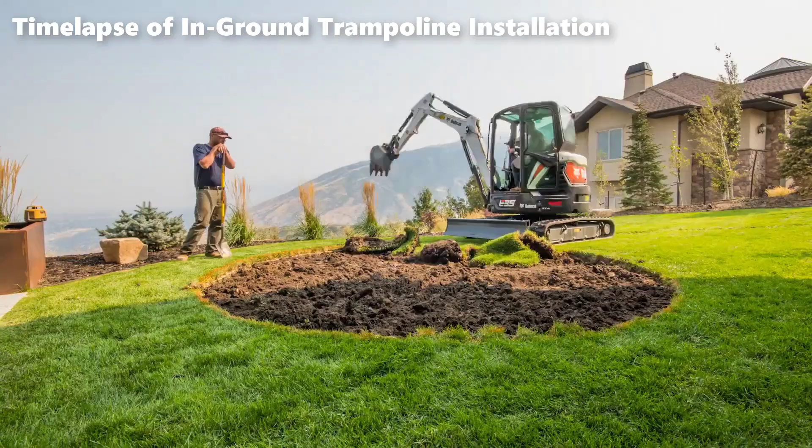Beginning with the excavation phase, heavy machinery deftly removes soil to create a precise pit matching the dimensions of the trampoline. Watching the ground gradually give way to reveal the earth below sets the stage for the exciting transformation ahead.

As the excavation progresses, workers position the trampoline frame within the emerging pit. Guided by precise measurements, they lower the sturdy structure into place, ensuring it fits snugly and securely. This crucial step sets the stage for the subsequent assembly of the trampoline components.

With utmost precision, the workers lower the trampoline frame into the excavated area, aligning it to ensure a perfect fit. Each corner is carefully checked to guarantee proper alignment and stability, essential for safe bouncing experiences. Their attention to detail not only ensures the trampoline rests securely within the pit, but also lays the foundation for countless hours of enjoyment and recreation, promising a haven for fun-filled moments in the backyard landscape.

Next, the trampoline mat is carefully positioned, unfurling like a giant canvas over the frame. This process begins with leveling and smoothing the excavation area to create a stable base. Geotextile is then laid to provide additional reinforcement and prevent soil erosion.

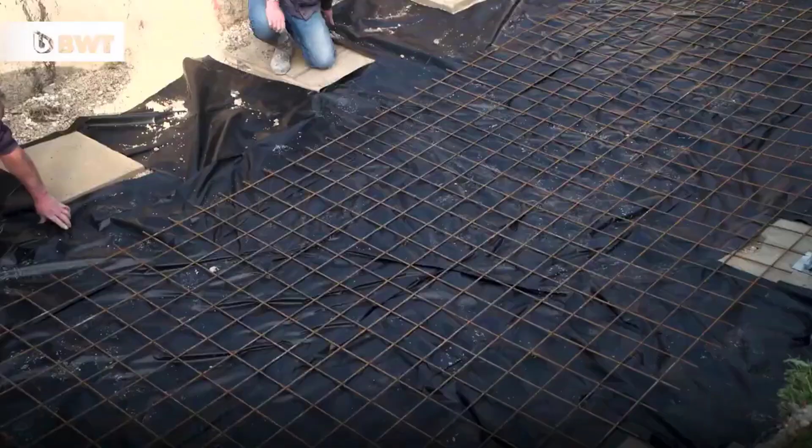Before proceeding, the gravel layer is covered with polyethylene film to maintain integrity and prevent soil contamination. Reinforcement is then laid across the entire excavation area to enhance structural stability.

The metal struts are assembled next, with 8 straight bars forming the upper part and 12 flat bars connecting the lower part. Finally, a concrete layer at least 3 centimeters thick is poured over a steel mesh, allowing for proper curing over a period of 3 weeks.

Once the earthwork is complete, it's time to assemble the wooden structure of your pool. Begin by assembling the wooden construction, followed by the wooden planks.

Start with the planks forming the wide face of the pool, ensuring tabs face upwards. Place the planks for the long edges of the pool on the corner pieces. Attach end profiles of the struts and assemble wooden wedges for the handrail, ensuring they are flush with the top of the wall. Mount the fittings to stabilize the handrail and keep it in position.

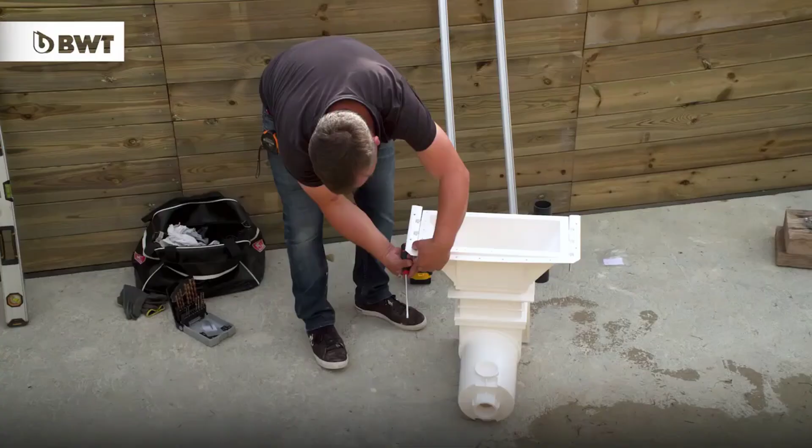To ensure effective filtration, carefully assemble the skimmer, taking care to tighten screws by hand to prevent damage. Next, install the inlet nozzle securely, ensuring proper alignment. Then, strategically place the filtration pipes to avoid any bends or kinks, maximizing the efficiency of water circulation and filtration within your massive wooden pool.

During the assembly of automatic cover parts, it's essential to install the roller support bracket both outside and inside the wooden structure. This ensures proper support and functionality of the automatic cover system, allowing for smooth operation and effective pool coverage.

To ensure a watertight seal and durable construction, attention to detail is crucial during the installation of the waterproofing membrane for your massive wooden pool.

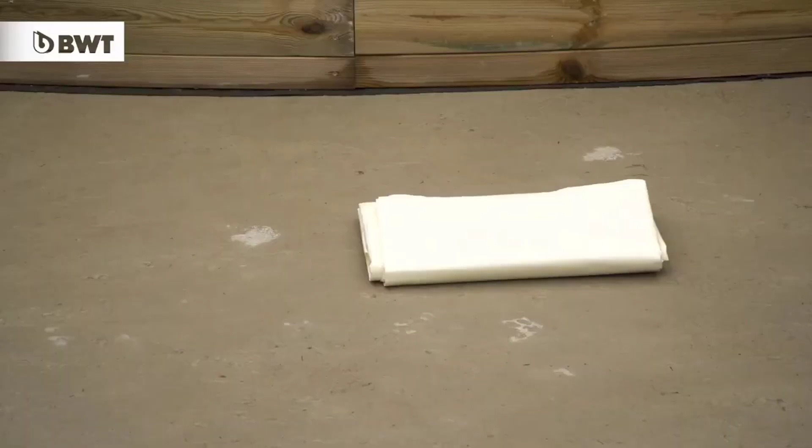Begin by positioning each part of the clamping profile meticulously to ensure a seamless connection between components. It's imperative that the holes drilled for fasteners are precisely horizontal and perpendicular to the pool wall, guaranteeing structural integrity and a secure fit. Next, carefully apply the liner, ensuring it aligns perfectly with the pool's dimensions and contours.

Pay close attention to the corners, ensuring they correspond precisely with the pool wall for a snug and seamless fit. Smooth out any wrinkles or creases in the liner to prevent potential leaks and maintain an aesthetically pleasing appearance.

Before filling the pool with water, it's essential to install flanges at designated locations. These flanges provide additional reinforcement and sealing, ensuring the waterproofing membrane remains intact and effective over time. Installation of the flanges should occur once the water reaches specified levels, allowing for proper alignment and a secure attachment.

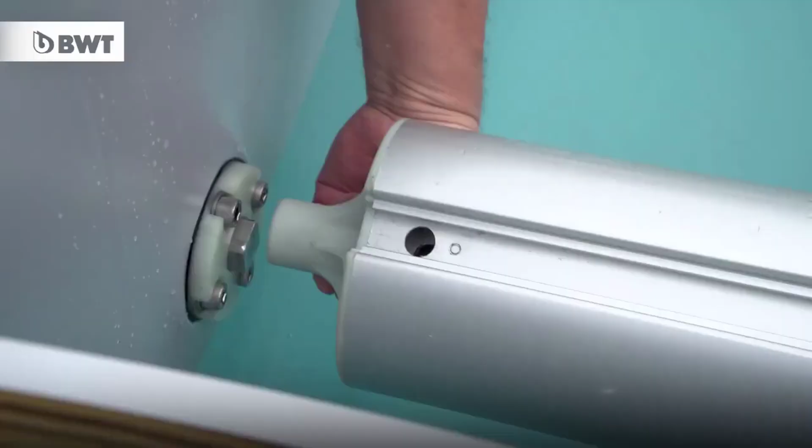Begin by sliding the shaft of the automatic cover flush with the wall passage, ensuring it fits snugly into place. Next, firmly press the shaft into the axle using a rubber mallet, ensuring it is securely seated. This step is critical for ensuring smooth operation and preventing any potential slippage or misalignment of the cover mechanism.

After securing the shaft, attach the beams over the pool to support the automatic cover system. These beams provide structural reinforcement and ensure the cover operates smoothly and efficiently. Use O-rings at connection points to create a watertight seal, preventing water leakage and ensuring the integrity of the cover system.

Additionally, install the partition wall and underwater light to enhance the functionality and aesthetics of your pool. The partition wall helps separate different areas of the pool, while the underwater light provides illumination for nighttime swimming and adds ambiance to your pool area.

Extending the handrail 25 mm into the pool's interior ensures stability and safety. It also adds a finishing touch to the pool's design.

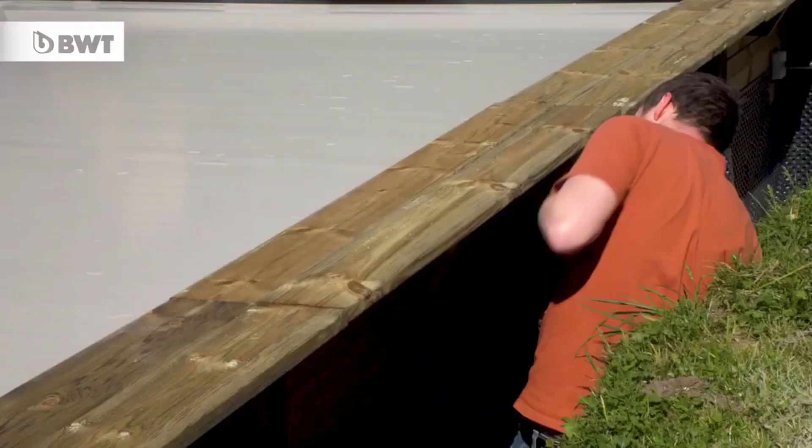Next, assemble and install the slat frames between the wall and the beam, ensuring they are positioned accurately. Secure tension bands to the slat frame to maintain tension and prevent sagging, ensuring the cover operates smoothly.

Finally, mount the motor for the automatic cover by sliding the rubber ring onto the motor shaft. Ensure the rubber ring fits snugly to prevent slippage during operation. Insert the pin into the shaft recess securely, completing the installation of the motor.

By following these detailed assembly instructions, you'll ensure the successful setup of your massive wooden pool, Urban Pools XL. With each step carefully executed, your pool will boast structural integrity, reliability, and longevity.

From the initial earthwork preparation to the installation of the automatic cover and finishing touches, every aspect of the assembly process contributes to creating a luxurious and inviting backyard oasis.

With your Urban Pools XL assembled according to these instructions, you'll enjoy years of relaxation and enjoyment with family and friends. Whether you're lounging poolside on sunny days or taking a refreshing dip to escape the heat, your massive wooden pool will be a focal point of outdoor entertainment and leisure.

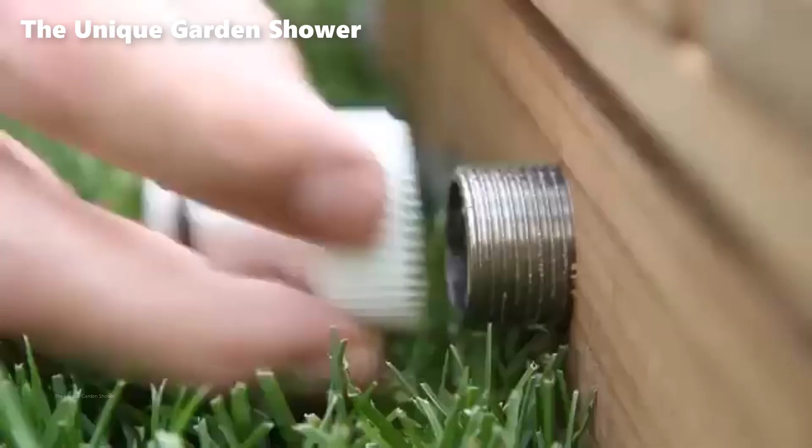Upon stepping onto its platform, the magic unfolds. A spectacle of water emerges, rising gracefully to towering heights at the perimeter before delicately descending in a cascade, akin to the soft patter of a summer rain.

The interplay of light and liquid creates an enchanting ambiance, inviting users to indulge their senses and bask in the moment. This garden shower is more than just a practical amenity, it's an oasis of rejuvenation.

After an invigorating workout or a leisurely sunbathing session, its refreshing embrace becomes a welcome respite. The gentle caress of the falling water soothes tired muscles, while the revitalizing mist invigorates the senses, leaving one feeling invigorated and renewed.

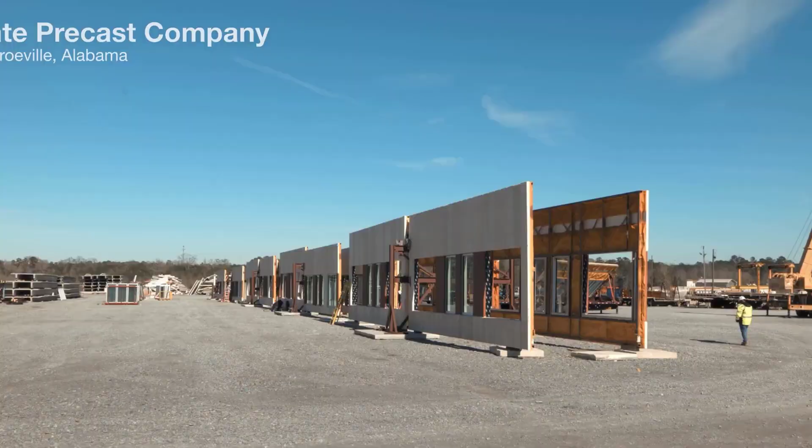The utilization of prefabrication not only streamlines the building process, but also enhances quality control, fosters safer working conditions, minimizes waste, and promotes energy efficiency.

From the innovative GateLite architectural facade system to the traditional prefabricated concrete panels, adorned with gate stone finish, every aspect of the design reflects a commitment to longevity and environmental stewardship.

The project commenced with the construction of the first new filter bed, preceded by the careful demolition of the existing filter bed.

The new beds were meticulously designed, each comprising 37 wall units standing at 2.50 meters in height, along with 208 filter bed tiles. Notably, the individual wall units were specially cored to accommodate feed pipes and washout pipes, emphasizing the attention to detail in the design phase.

A key aspect of the installation was the unique stainless steel bolting system used to marry the filter bed wall panel units together. This innovative approach ensured structural integrity and stability, critical for the efficient functioning of the waste treatment process. Additionally, props were strategically employed to support every third concrete unit, while steel fixings were securely fastened, further enhancing the robustness of the system.

Phase 1 of the project was successfully completed, marking a significant milestone with the first new bed brought into immediate operation. This was accompanied by the demolition of the old waste treatment plant, making way for the installation of the brand new filter bed system.

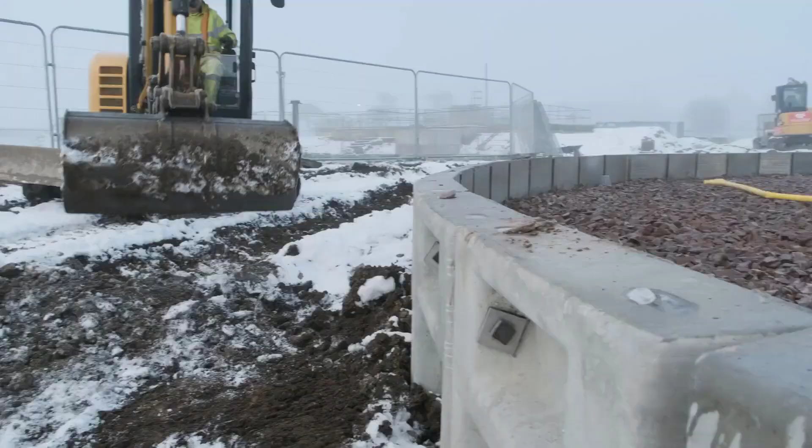supplied from FP McCann's Littleport factory, highlights the scale of the undertaking. Despite the complexity and volume of materials involved, meticulous coordination ensured smooth progress throughout the project.

During preparation, all loose and deteriorating concrete is removed to ensure a clean, porous surface for optimal bonding with TF structural deep repair mortar. Thorough removal is essential for a durable and long-lasting restoration of the staircase.

Using 2x8s and duct tape, forms are constructed to match the desired shape and dimensions of the staircase. Care must be taken to protect the wood with duct tape to prevent unwanted bonding with the TF structural deep repair mortar. The forms are positioned and secured in place, ensuring they are level and properly aligned.

Attention to detail is crucial during this phase to guarantee the final stairs meet structural and aesthetic requirements. Additionally, any necessary adjustments are made to accommodate variations in height and slope.

Once the forms are in place, they serve as a mold for the TF structural application. The forms provide boundaries for the mortar, guiding its placement and ensuring uniformity across the staircase. Properly formed stairs result in a smoother application process and a more polished final outcome.

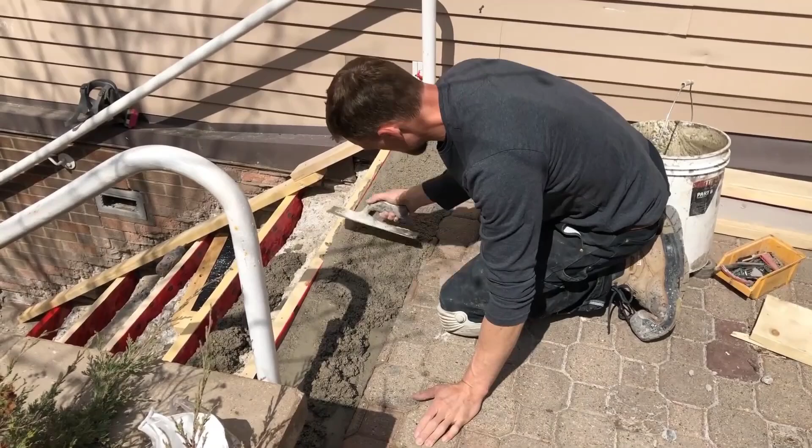During mixing, attention is paid to achieve the desired consistency. The mixture should be smooth and workable, allowing for easy application while ensuring it stays in place without flowing off the stairs. The proper consistency ensures optimal bonding and a uniform finish.

Once the mixture is prepared, it is applied to the staircase surface using a trowel. Careful consideration is given to ensure even coverage and proper thickness, especially when applying a skim coat. The trowel is used to spread the overlay evenly, working it into the surface and smoothing out any imperfections.

After the overlay is applied, additional tools may be used to refine the finish. For instance, a margin trowel can be used to round the edges of the steps, creating a smoother transition between the overlay and the existing structure. A broom may be used to create texture on the treads, enhancing traction and safety.

Edge finishing involves using a margin trowel or similar tool to round the edges of the steps, ensuring a smooth transition between the overlay and existing structure. This process creates a polished appearance and minimizes the risk of chipping or unevenness along the edges of the staircase.

Troweling and final swipes are critical steps in achieving a smooth and uniform finish on the concrete overlay. After the overlay mixture is applied to the staircase surface, a trowel is used to spread and work the material into place. This process helps to ensure even coverage and proper thickness throughout the stairs.

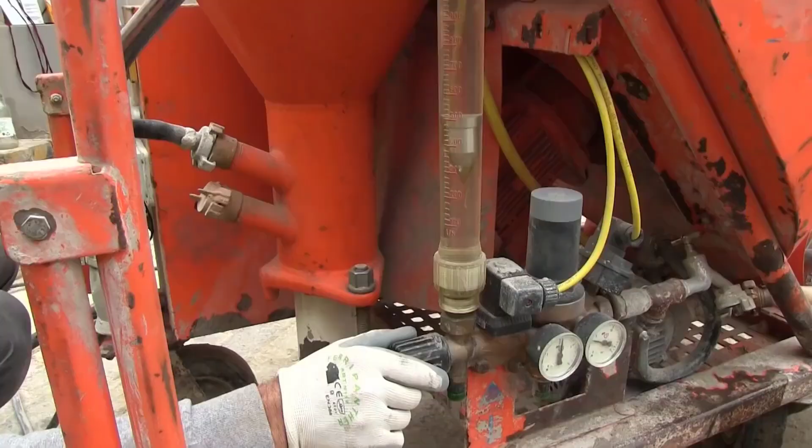During the placement phase of the sprayable rendering process, the prepared mortar mixture is loaded into the machine launcher. It's crucial to achieve the right consistency by gradually adding water until a creamy texture is attained, ensuring optimal workability. The nozzle of the mortar spraying device is positioned perpendicular to the surface, typically maintained at a distance of 10 to 15 centimeters. With precision, the mortar is projected between the level points or guides, covering the entire surface evenly.

During leveling and finishing, the applied mortar is smoothed and leveled using appropriate tools such as wooden or rubber trowels. This process aims to create a uniform surface according to the desired finish. Once leveled, the mortar is left to reach the appropriate touch-dry stage before final finishing with a trowel.

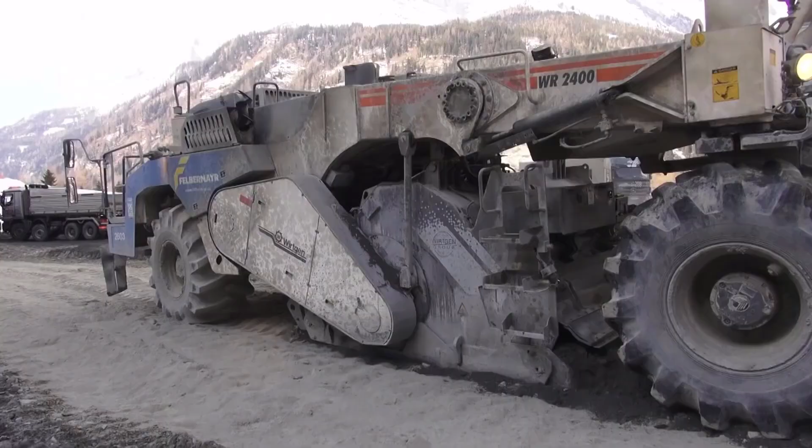The project in Zederhaus, undertaken by Felbermayr, aims to address the escalating traffic volume on the A10 Tauern motorway, which reached 20,000 vehicles per day by 2017. Initiated in 2013, it involves enclosing a 1,500-meter section of the highway to mitigate the impact on local residents.

The endeavor, endorsed by ASFINAG and governmental bodies, commenced with Felbermayr Tiefbau undertaking various tasks, including constructing bridges and widening the road. Significant efforts were made to accommodate the Zederhaus stream and maintain traffic flow during construction. This involved demolishing existing structures and employing shotcrete to stabilize slopes, covering an area equivalent to 4 football fields. Additionally, extensive use of anchors and concrete was necessary, with drilling depths reaching up to 15 meters.

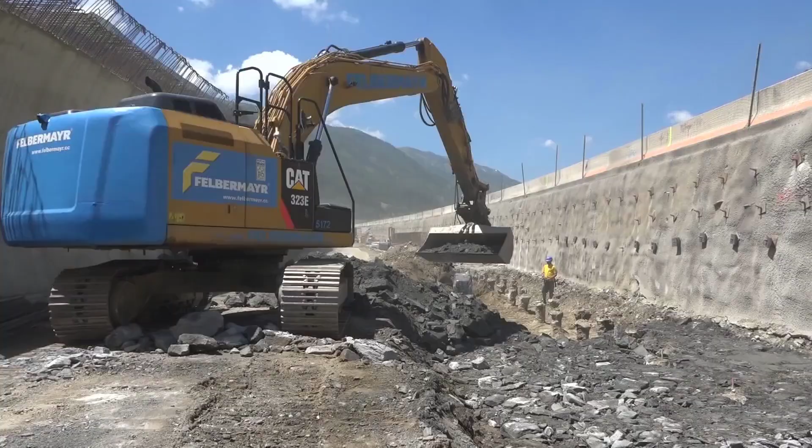The enclosure process began with the construction of tunnel tubes, necessitating unforeseen shallow foundations to enhance ground stability. Fire safety concerns led to the use of concrete rather than asphalt within the tunnels. Construction proceeded with open methods, coupling formworks for efficient pouring of concrete sections. A total of 125 segments were required for the tunnel construction, utilizing fire-resistant fiber concrete with substantial wall thicknesses.

Completion of the first tunnel tube in August 2015 marked a milestone, followed by the installation of electrical equipment and its opening to traffic in December 2015. The second tunnel tube's rough construction was completed in the same month, with subsequent sealing and membrane installation. Excavation for the enclosure began in February 2016, using material from the second tunnel tube's excavation.

By March 2017, both tunnel tubes were operational, contributing to noise reduction for local residents. This was supplemented by the erection of noise barriers before and after the enclosure. In July 2017, ASFINAG granted final approval for the project's completion, acknowledging Felbermayr's successful execution despite adverse conditions. The Zederhaus project represents a significant achievement, demonstrating Felbermayr's capabilities in managing complex infrastructure projects.

Despite challenges such as adverse weather and unforeseen ground conditions, the project was completed on schedule, providing relief to residents and enhancing safety for motorists.

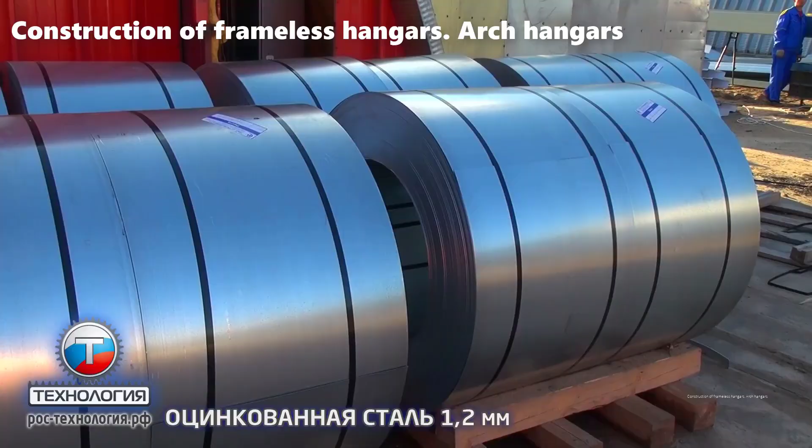The steel used has a thickness of 1.2 millimeters, ensuring durability and structural integrity, while also providing sufficient strength to support the construction and withstand various environmental conditions.

Steel shaping involves the process of manipulating steel materials into desired forms and configurations to meet specific structural requirements. This may include bending, cutting, welding, or forging the steel to achieve the desired shape and dimensions. Automated machinery may be employed to carry out these tasks with precision.

Various techniques, rolling, pressing, or stamping, may be utilized, depending on the complexity of the design and the properties of the steel being used. Proper shaping is essential for ensuring structural integrity, aesthetic appeal, and functionality of the final product. Attention to detail during the shaping process is crucial to meet design specifications, optimize material usage, and ensure the longevity and performance of the steel components in various applications.

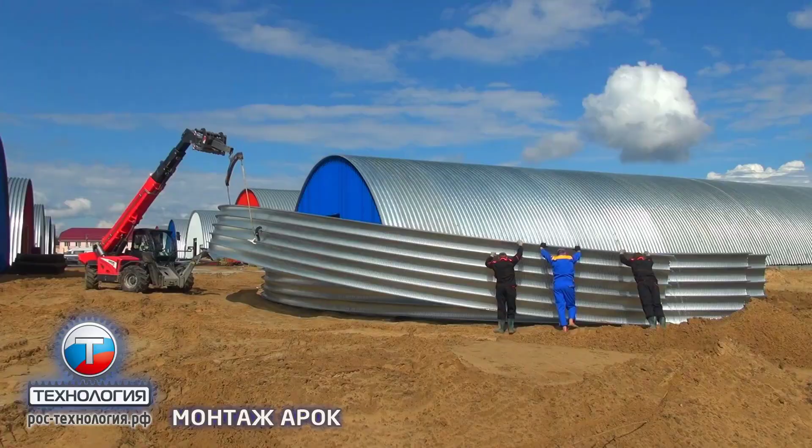Assembling the neck ring involves the careful construction and integration of a crucial component within a structure, typically found in applications such as tanks, vessels, or industrial equipment. The neck ring serves as a connection point or collar where other components are attached, or through which materials are transferred. The process begins with the selection of suitable materials for the neck ring, often steel or another durable metal alloy, chosen for its strength and corrosion resistance.

These materials are then cut, shaped, and machined to precise specifications to ensure proper fit and functionality within the overall assembly. Next, the individual components of the neck ring are assembled according to engineering drawings or schematics. This may involve welding, bolting, or riveting the pieces together, depending on the design requirements and the materials being used. Skilled welders or technicians meticulously join the components, paying close attention to detail to ensure structural integrity and alignment.

Once the individual components are assembled, the neck ring is integrated into the larger structure or system. This may involve welding or fastening the neck ring to other structural elements, such as tanks or vessels, using techniques that provide secure connections and maintain structural stability.

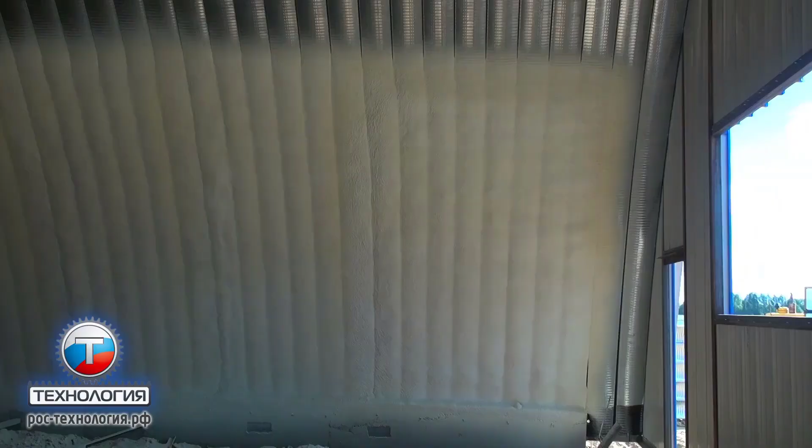The insulation process begins with meticulous preparation to ensure efficient and safe application. Technicians must adhere to specific guidelines to drill 12mm injection holes through mortar joints, maintaining a consistent pattern across the cavity wall. Additional openings are made around areas like windows, doors, and eaves to guarantee comprehensive coverage.

Each step of the process demands strict adherence to safety protocols. Technicians must don appropriate personal protective equipment, PPE, to mitigate potential health risks associated with handling insulation materials. This includes wearing gloves to protect the hands from chemical exposure and abrasions, overalls to prevent skin contact with the foam, boots to shield against slips, safety glasses to safeguard the eyes from debris, and a face mask equipped with appropriate filters to prevent inhalation of hazardous fumes.

The face mask is particularly crucial as it helps prevent respiratory allergies and sensitivities by filtering out harmful particulates and organic vapors, such as the isocyanate component present in polyurethane foam. Before the actual injection of foam into the cavity walls begins, it's imperative to conduct rigorous quality checks to ensure the efficacy of the insulation.

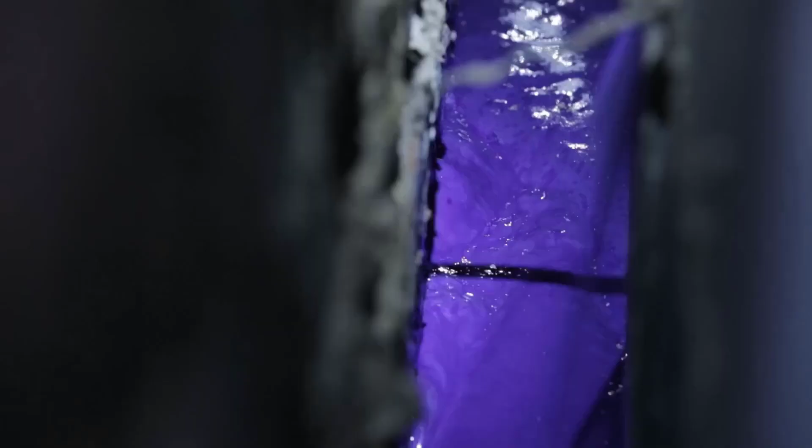Samples of the foam are produced to assess various parameters, such as reactivity, adhesion strength, and cell structure. This preliminary step is crucial in identifying any potential issues before proceeding with the full-scale injection process. The foam is carefully dispensed into a polythene-lined container to prevent contamination and maintain its purity.

Once dispensed, the reactivity of the foam is timed to ensure proper application. Technicians monitor the foam as it sets, paying close attention to its adhesion strength and the uniformity of its cell structure. Any deviations from the desired properties may indicate the need for adjustments or troubleshooting before proceeding further.

To accurately determine the foam's density, it is dispensed into a container with a known volume and allowed to cure completely. After curing, the weight of the foam is measured and recorded. By dividing the weight by the volume, technicians can calculate the foam's density, providing valuable insights into its insulation effectiveness.

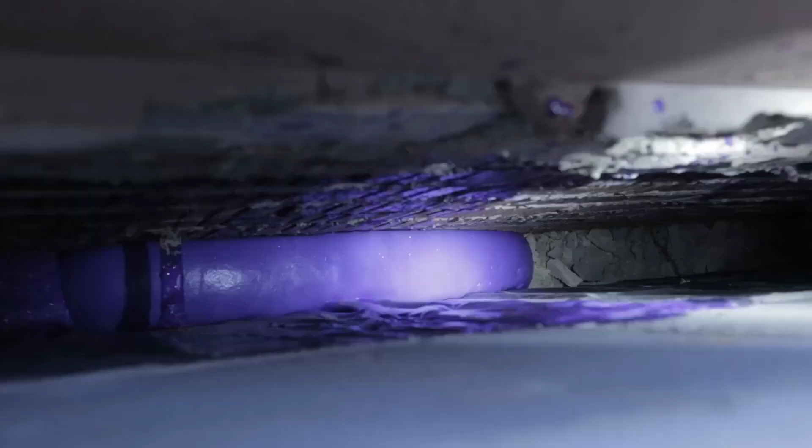With quality checks completed and parameters confirmed, the injection process commences. Foam injection proceeds methodically along each horizontal line of drilled holes, ensuring thorough coverage from the bottom of the cavity upwards. Dowels are utilized to mark filled injection points, preventing excess foam extrusion and ensuring precise application.

Throughout the injection process, technicians must exercise caution to avoid over-injecting the foam beyond its cream time. Over-injection can lead to undesirable outcomes, such as splitting and shrinking, compromising the integrity of the insulation. Additionally, care must be taken to prevent overpressurization of the cavity, especially in closed areas like window frames, to avoid potential damage to the structure.

Once each level of the cavity is filled, the set foam is carefully inspected to ensure proper adherence and uniformity. Technicians verify that the foam has adequately expanded and cured before proceeding to the next level. This approach guarantees that the insulation is applied effectively and delivers optimal performance in terms of thermal efficiency and structural integrity.

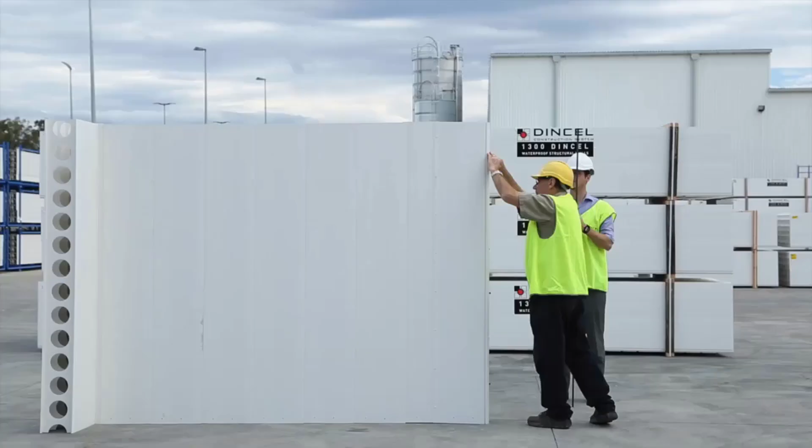Horizontal and vertical reinforcement hook bars streamline construction by simplifying installation processes. Their hook ends facilitate rapid alignment and connection, reducing labor time. These hooks interlock with other bars swiftly, ensuring a secure fit. Consequently, construction teams can expedite the placement of reinforcement, accelerating overall project progress. This efficiency not only saves time but also minimizes labor costs, making the construction process more economical without compromising structural integrity or safety standards.

The process begins with careful planning and preparation, where builders evaluate the dimensions and specifications of the structural components involved. Each corner must be precisely measured and marked to ensure accurate placement of panels or elements during assembly. Next, corner brackets or connectors may be utilized to secure the structural elements together. These brackets are often made of durable materials such as steel or aluminum and are designed to provide robust support and reinforcement at the corners. They come in various shapes and sizes depending on the specific requirements of the project.

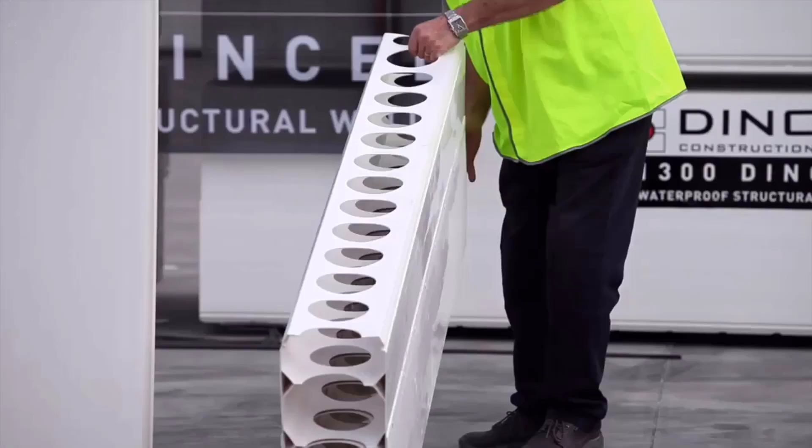During assembly, attention to detail is crucial to guarantee proper alignment and fitment of the structural elements. Builders must ensure that corners are square and true, using levels, squares, and other precision tools to verify alignment. Once the panels or structural elements are in position, fasteners such as screws, bolts, or welding may be employed to secure the corner assembly firmly in place. These fasteners are chosen based on factors such as load-bearing capacity, corrosion resistance, and structural requirements.

Horizontal reinforcement installation involves placing steel bars parallel to the ground within concrete structures. This process enhances structural strength and durability by reinforcing the concrete against tension forces such as those experienced during earthquakes or high winds.

Main panel installation involves positioning large structural elements, often prefabricated, in designated locations to form the primary framework of a construction project, such as a lift shaft or stairwell. Proper alignment and anchoring are crucial for structural integrity.

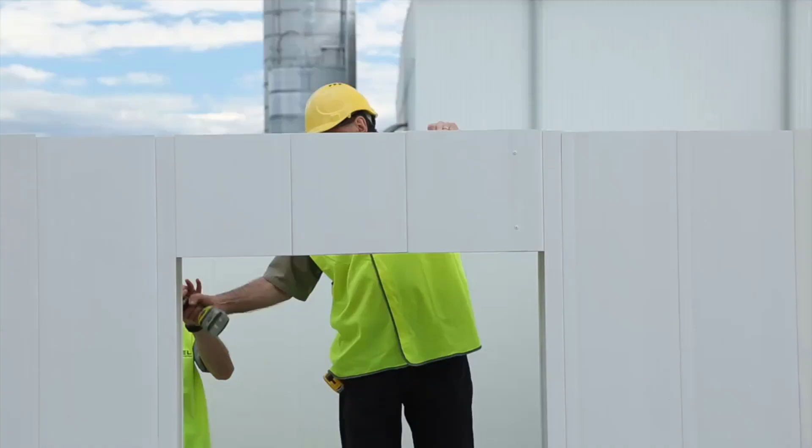Horizontal reinforcement and corner hook bars are steel components used in construction to strengthen concrete structures. Horizontal bars reinforce against tension forces, while corner hooks facilitate secure connections at corners, enhancing structural stability. Panels can be precisely cut to specified door length sizes, ensuring a tailored fit for door installations within a lift shaft or stairwell. This customization optimizes efficiency and accuracy in the construction process.

Before laying tiles, prepare the substrate, ensuring it's clean, dry, and level. Verify flatness, adhering to the specified 1 mm deviation per 2 meters. Opt for a C2 class tile adhesive known for its enhanced adhesion, particularly ideal for flooring applications. This ensures the tiles adhere securely to the substrate, reducing the risk of displacement or cracking over time. Such preparation forms the foundation for a durable and aesthetically pleasing tile installation.

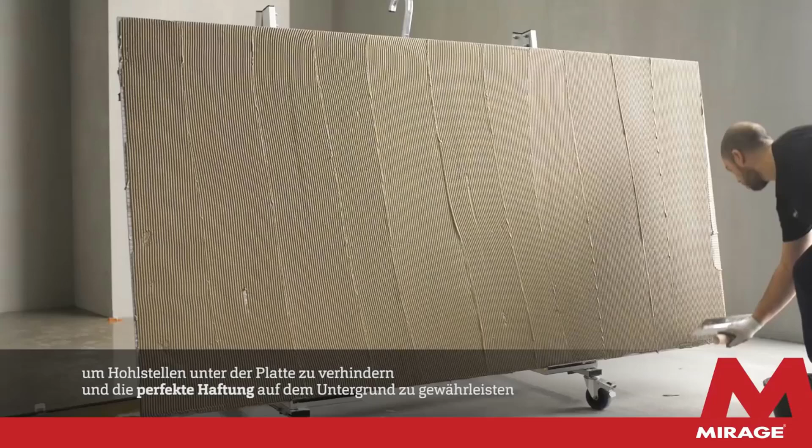Applying adhesive in a double layer is recommended to guarantee optimal adhesion and eliminate voids beneath the tiles. This method involves spreading a first layer of adhesive evenly across the substrate using a notched trowel. Subsequently, another layer is applied over the first, ensuring complete coverage and filling any gaps. The double layer technique ensures a strong bond between the tiles and substrate, minimizing the risk of air pockets and enhancing the overall stability and longevity of the tile installation.

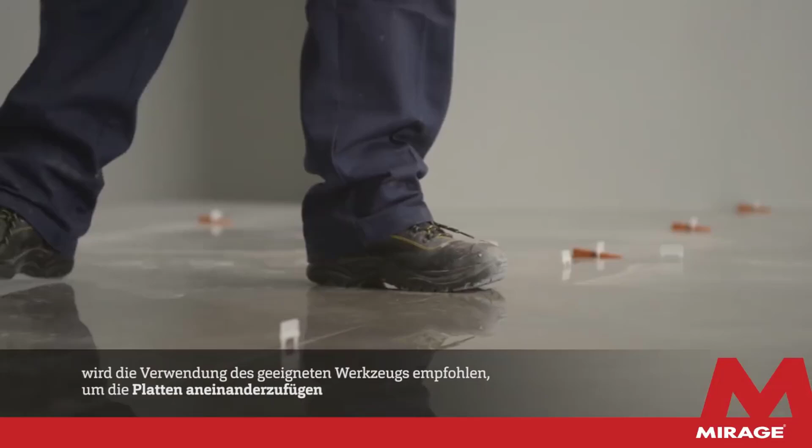To ensure a flawless tile installation, it's crucial to eliminate excess air by tapping tiles gently from the center to the edges. This process prevents potential cracking or breaking during installation, guaranteeing tiles lay flat and securely. Using appropriate tools for joining tiles is essential, promoting precise alignment and minimizing irregularities. Employing a suitable leveling system is equally critical, maintaining a completely flat tile surface and preventing lippage between adjacent tiles. These practices ensure not only an aesthetically pleasing result, but also a durable and long-lasting tile installation, resistant to potential issues such as unevenness or displacement.

T-type tile adhesive, specifically designed for wall tile applications, offers several advantages that contribute to a successful and secure installation. One of the primary benefits is its ability to reduce slippage during the installation process, particularly when working with larger or heavier wall tiles.

The T-type adhesive, also known as thin-set mortar, is formulated with special additives that enhance its bonding properties and improve adhesion to vertical surfaces. This adhesive typically has a thicker consistency compared to standard tile adhesives, providing better support and minimizing the risk of tiles sliding down the wall before the adhesive sets.

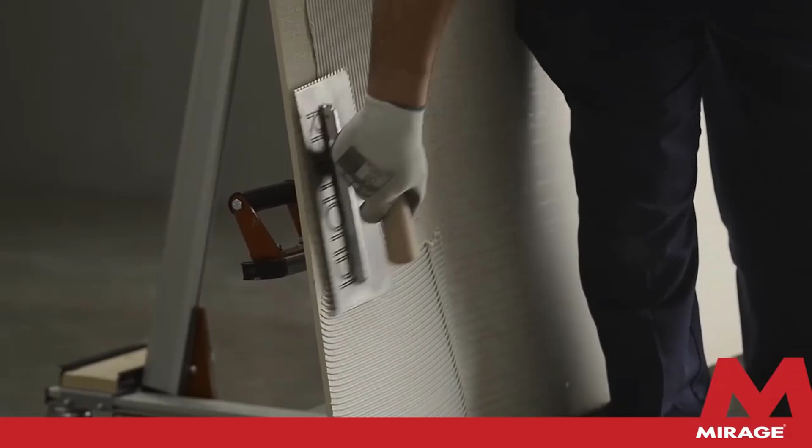The unique formulation of T-type adhesive includes polymers and additives that increase its tackiness and reduce the likelihood of tiles shifting or slipping during installation. This is especially important when working with large format or heavy wall tiles, as their weight can put additional stress on the adhesive as it sets.

Furthermore, T-type adhesive often has extended open times, allowing installers more flexibility to adjust tile placement before the adhesive sets. This is advantageous when working on intricate or detailed installations where precise alignment is critical. Another factor that contributes to reduced slippage is the texture of T-type adhesive. Many T-type adhesives have a gritty or rough texture that provides additional grip between the tile and the substrate, further minimizing the risk of slippage.

Additionally, T-type adhesive is formulated to withstand vertical pressure and gravity, ensuring that tiles remain securely in place once installed. This helps prevent issues such as tiles sagging or shifting over time, which can compromise the integrity of the installation.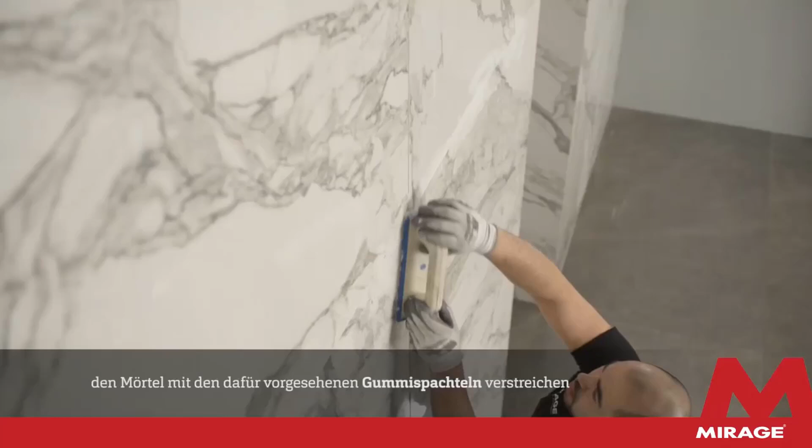Once the tiles are set and the adhesive has cured slightly, excess adhesive or grout must be removed to achieve a clean and polished look. This is typically done using a damp sponge, which is lightly run over the surface to wipe away any excess material. Care must be taken not to disturb the tiles while cleaning. This final step adds the finishing touch to the tile installation, leaving behind a professional and flawless result.

The initial step in the trenchless shaft rehabilitation process involves the meticulous digitization of the shaft using cutting-edge 3D laser scanning technology. This advanced scanning equipment is strategically positioned within the existing shaft, ensuring comprehensive coverage of the entire structure. Controlled through an intuitive app interface, the scanner systematically captures detailed data points at 1-meter intervals from the top to the bottom of the shaft.

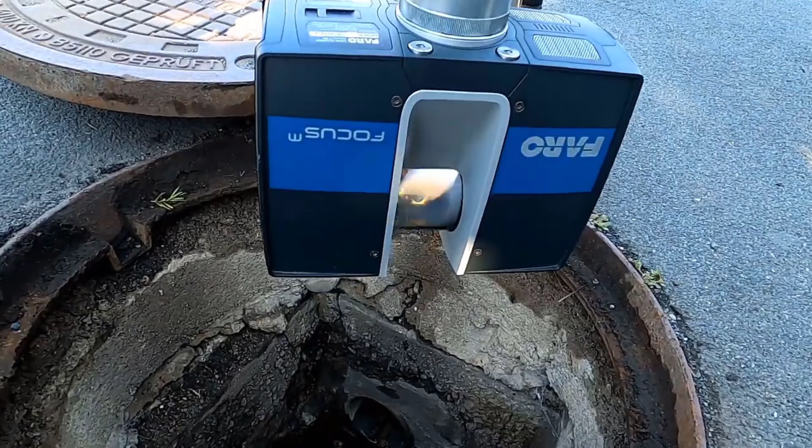The collected data is then processed using specialized software, where it undergoes intricate analysis and compilation. Engineers meticulously examine the digital representation of the shaft, leveraging the comprehensive 3D model to gain insights into its condition and structural integrity. This detailed model serves as a vital foundation for the subsequent stages of the rehabilitation process.

Through the 3D model, engineers can identify any existing defects, deterioration, or anomalies within the shaft. From cracks and corrosion to deformations and misalignments, every aspect of the shaft's condition is meticulously evaluated. By conducting a thorough assessment, engineers can determine the most appropriate and effective rehabilitation measures to address any identified issues.

Moreover, the digital model facilitates collaborative discussions among stakeholders, allowing for informed decision-making regarding the rehabilitation plan. Engineers can visualize the proposed interventions within the context of the digital model, enabling them to assess their feasibility and potential impact accurately.

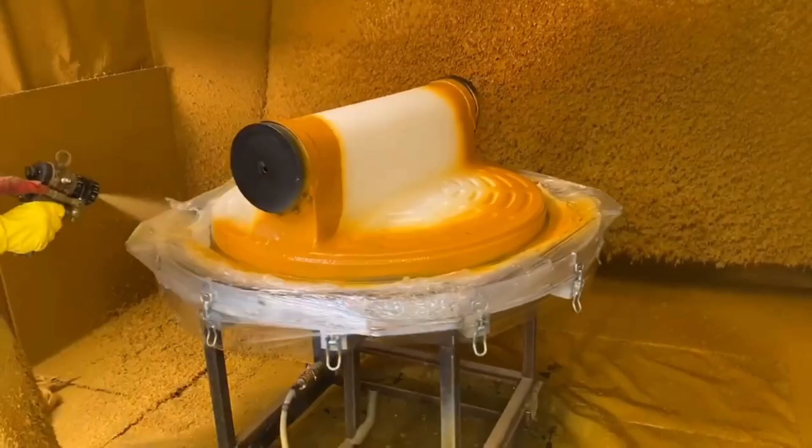With the 3D model at their disposal, engineers can engage in collaborative discussions to devise an optimal rehabilitation plan. Factors such as structural integrity, material requirements, and project timelines are carefully considered during this phase.

At the heart of the PREDL-FLEXLINER system lies precision engineering and meticulous craftsmanship. Using computer numerical control, CNC, milling technology, a negative mold of the new shaft collar is crafted. This mold serves as the template for producing the installation components required for rehabilitation. Skilled technicians meticulously manufacture the PREDL-FLEXLINER components, ensuring uncompromising quality and dimensional accuracy.

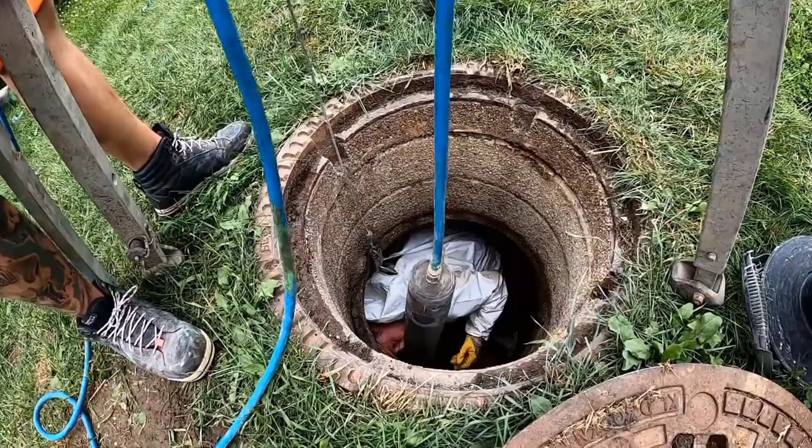Prior to the insertion, a section of the shaft, typically 66 centimeters, is excavated to accommodate the rehabilitation construction. The liner is then carefully folded and inserted into the shaft non-destructively through the access point, known as the bonnet. Specialized sealing bladders are strategically positioned to seal off inflows and outflows within the shaft. Additionally, styrofoam support bodies are introduced during backfilling to provide stabilization and prevent buoyancy once the liner is securely positioned within the shaft.

Attention turns to the rehabilitation of the shaft rings. A smaller head, constructed from durable 3mm plastic material, is utilized for this purpose. Through meticulous welding techniques, the connection between the liner and the smaller head is established, ensuring structural integrity and longevity. Any protrusions or irregularities originating from the shaft rings are addressed and sealed with protective caps to prevent infiltration during backfilling.

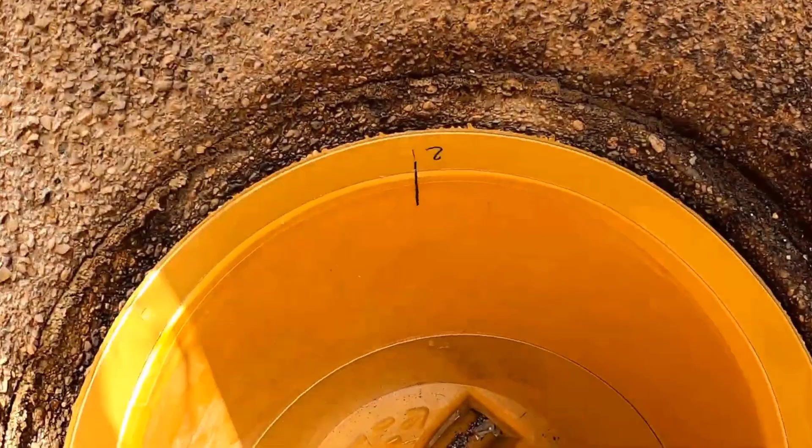With the rehabilitation components securely in place, the final phase of the process commences. Grout mortar is meticulously introduced into the shaft to ensure proper backfilling and structural stability. The styrofoam support bodies, provided by PREDL, are removed, and the fully rehabilitated structure undergoes a thorough cleaning process. Finally, meticulous attention is given to the aesthetics of the rehabilitated shaft, with any imperfections addressed and rectified.

Approximately 9,000 tunnel rings, each composed of 6 segments, are essential for constructing the dual Forrestfield Airport link tunnels. A custom concrete blend is formulated to meet stringent requirements for the tunnel segment construction.

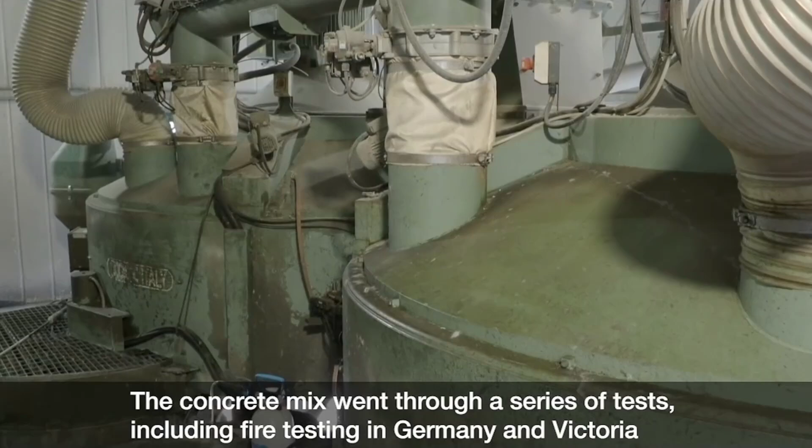The concrete mix underwent rigorous examination, including extensive fire testing conducted in Germany and Victoria. These tests assessed its resilience and durability under high-temperature conditions, crucial for tunnel safety. Various other evaluations were performed, scrutinizing its strength, composition, and reaction to stress. The aim was to ensure the mix met international standards, guaranteeing optimal performance and safety within the tunnels of the Forrestfield Airport link, underscoring the rigor applied in its development and validation.

During construction, a steel reinforcement cage is meticulously installed within each segment. 2 distinct cage types are utilized, tailored to suit the specific location within the tunnel, ensuring structural integrity and alignment compliance throughout the Forrestfield Airport link construction process.

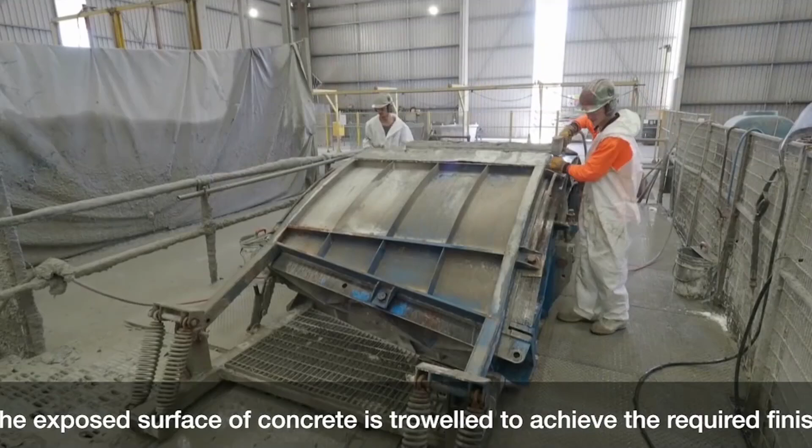Once the concrete is placed, skilled workers meticulously use trowels to smooth and perfect its exposed surface. This process ensures the desired finish, enhancing both the appearance and functionality of the tunnel segments within the Forrestfield Airport link, meeting stringent quality standards and ensuring optimal performance in service.

The steam chamber, operating at 100% humidity and temperatures reaching up to 55 degrees Celsius, provides an ideal environment for the curing process. This controlled setting accelerates concrete strength development, promoting robustness and durability in the tunnel segments for the Forrestfield Airport link, ensuring their structural integrity.

During curing, the segments are enveloped in insulated covers, maintaining controlled temperature and relative humidity for up to 72 hours. This prolonged period fosters an optimal curing environment, allowing the concrete to attain its desired strength and durability. This meticulous treatment ensures the tunnel segments for the Forrestfield Airport link achieve the necessary structural integrity and performance standards before deployment.

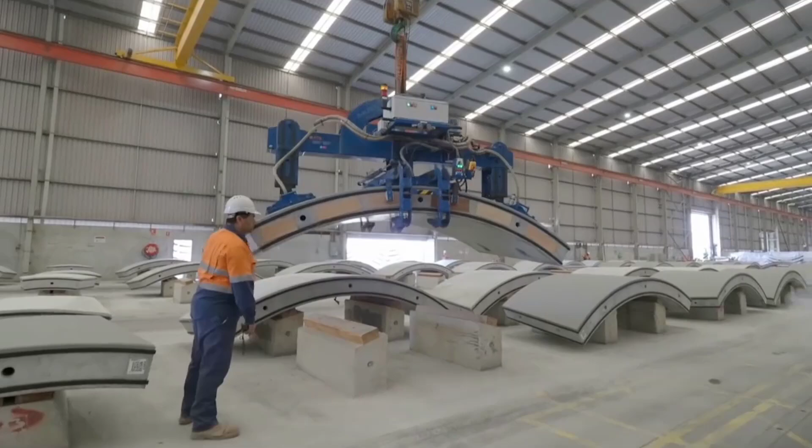Following segment construction, a meticulous application of 2 layers of waterproofing epoxy paint is undertaken on the external surface. This process serves as a protective shield, guarding against moisture ingress and environmental factors. The epoxy paint, renowned for its durability and sealing properties, forms a robust barrier, enhancing the longevity and resilience of the tunnel segments within the Forrestfield Airport link.

This safeguarding measure not only bolsters the structural integrity, but also ensures sustained performance, minimizing potential degradation from water exposure and external elements, crucial for the tunnel's reliability and safety throughout their operational lifespan.

Upon completion, each segment is delicately transferred to a tilting table, carefully maneuvered to facilitate further processing and quality checks. Once inspected and approved, these segments are moved to storage facilities, awaiting deployment by the tunneling team. The storage period allows for logistical coordination, ensuring the segments are readily available as needed during the construction phase of the Forrestfield Airport link.

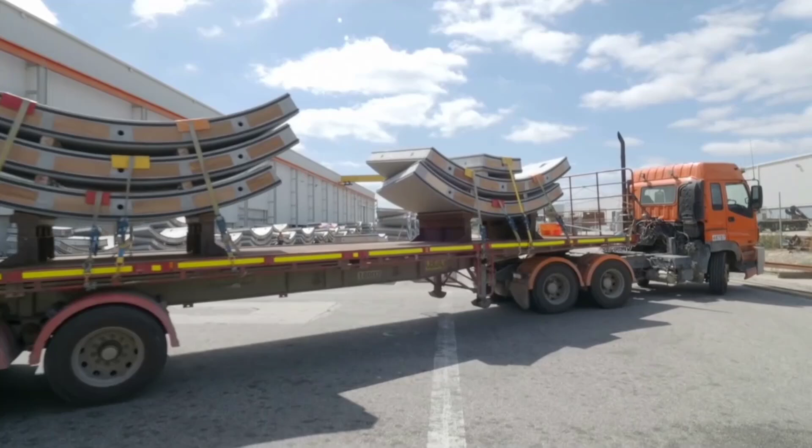While in storage, measures are taken to preserve their integrity and quality, safeguarding against any potential damage or deterioration. This handling and storage protocol guarantees that the segments are in optimal condition and seamlessly integrated into the construction process, contributing to the efficient and precise assembly of the tunnels when required.

Installing the supporting mesh involves affixing steel or synthetic mesh to tunnel walls to reinforce and prevent potential rockfall hazards. Shotcrete, a high-velocity sprayed concrete, is applied onto the tunnel walls post-mesh installation, fortifying the structure and enhancing stability against geological pressures and erosion.

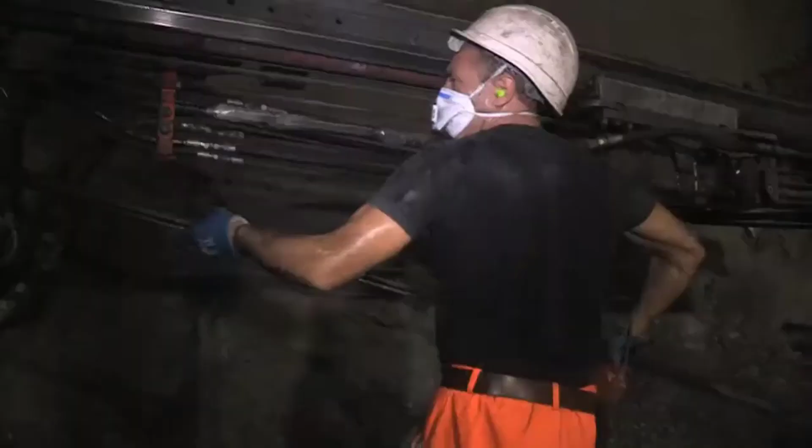Drilling for securing anchors entails precision drilling into the tunnel walls or surrounding rock. Holes are strategically positioned to insert anchors, ensuring stability. Specialized machinery drills holes of specific depths and diameters, and workers carefully place anchors, often made of steel, securing them in place to fortify the structure against potential shifts or collapses.

Securing anchors involves placing steel or concrete anchors into drilled holes, ensuring a secure fit. These anchors reinforce the tunnel walls, enhancing structural integrity and stability.

Drilling the blasting holes is a process where specialized equipment drills holes of precise depths and orientations into predetermined locations within the rock face. These holes are strategically planned to facilitate controlled blasting. The drilling machinery carefully creates the necessary pattern and depth, ensuring the subsequent explosives are placed effectively for controlled fracturing and excavation during the blasting phase of tunnel construction.

Preparing for the blast involves implementing safety protocols, evacuating personnel, and securing the area to ensure controlled detonation safety. Filling with two-component explosive involves precisely loading the drilled holes with measured amounts of distinct compounds, ensuring a controlled and effective blasting charge.

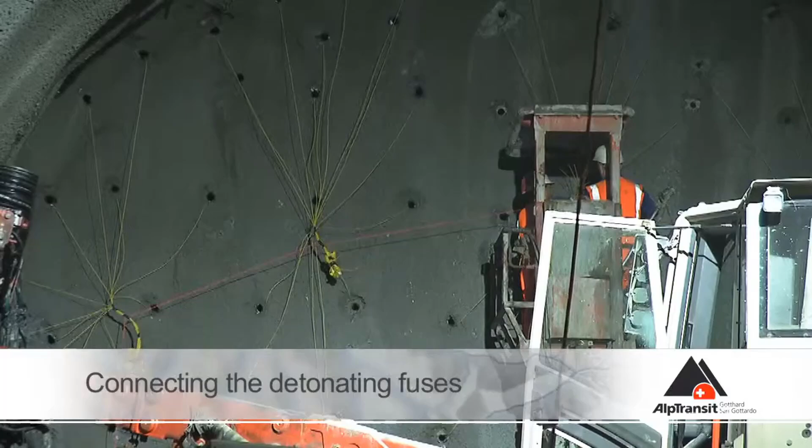Connecting the detonating fuses is a critical step in initiating a controlled explosion. After loading the holes with explosives, trained personnel meticulously connect the detonating fuses. These fuses serve as the link between the blasting caps or charges and the initiator, ensuring a sequential and controlled ignition. Workers carefully handle the fuses, ensuring they are securely attached to the explosives and properly insulated to prevent accidental ignition.

Various safety measures, including proper grounding and insulation, are observed during this process to minimize risks. Each fuse's length is calculated to introduce a calculated delay between charges, enabling a sequential detonation pattern, crucial for controlled fracturing and excavation of the rock mass.

Quality checks are conducted to verify the connection's integrity, ensuring they're free from any damage or defects that could compromise the detonation sequence. Any irregularities or faults are promptly addressed before the blasting operation. Clear communication among the team is essential during this phase to confirm that all connections are set correctly. Once confirmed, the area is further secured, and the initiation sequence is activated remotely, triggering the detonation process in a controlled and safe manner.

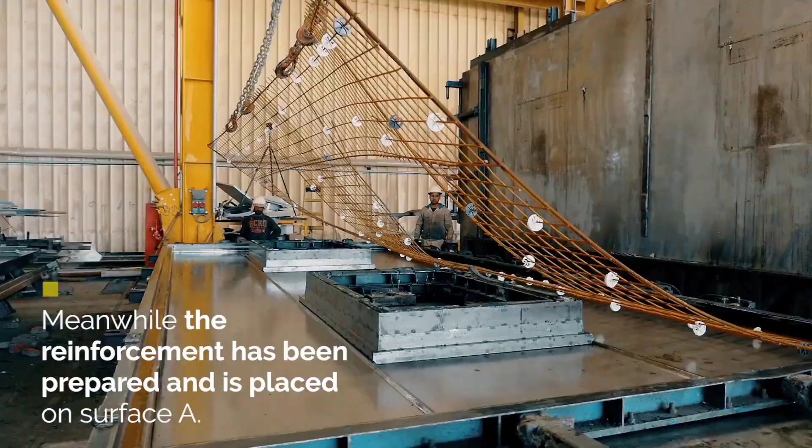Phase 1: Preparation and casting of surface A. The initial stage of this intricate process commences with the fastidious preparation of surface A. It begins with a meticulous cleaning routine, followed by the application of a release agent, ensuring a flawless separation once the panel is cured. Precision is key as mechanical extension arms are utilized to adjust the width of the panel, enabling seamless adaptation to desired dimensions. Subsequently, the bottom and top shutters are placed hydraulically, forming the fundamental framework for the panel.

The critical attachment of window molds to surface A, facilitated by magnets, signals the commencement of the intricate assembly process. Simultaneously, the reinforcement is meticulously prepared and strategically placed atop surface A to withstand the concrete pour. With acute precision, concrete is poured, guided by calibrated markers or indicators meticulously placed along the shuttering. Vibrations then ripple through the newly poured concrete, ensuring optimal settling and cohesion.

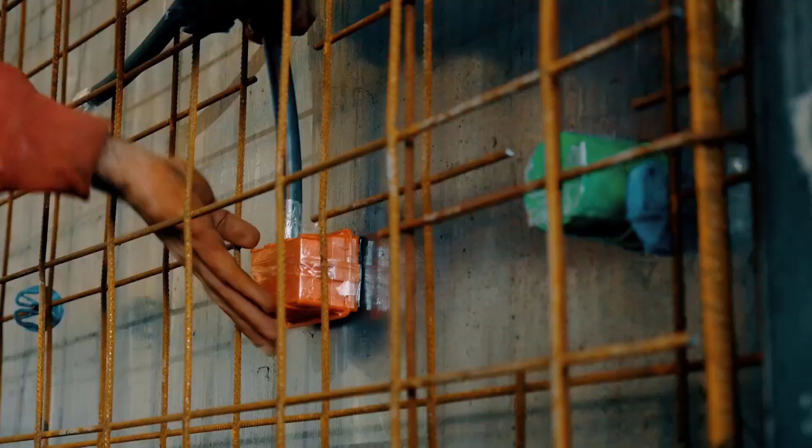Following the concrete pour, the insulation layer takes its place, intricately affixed to the concrete through thermal pins that penetrate approximately 5 centimeters into the material. This layer not only fortifies the panel's insulation capabilities but also aids in maintaining the concrete's temperature during the curing process. As surface A gradually attains a strength of around 9 megapascals through meticulous curing, preparations for surface B's creation take center stage.

Phase 2: Transition to surface B and preparation upon surface A reaching the designated strength threshold. A carefully orchestrated sequence of hydraulic maneuvers tilts the horizontal table. This movement primes surface A for a pivotal transition as it is moved against surface B, necessitating the deactivation of the window shutter magnets. With precision, the two surfaces align, guided by closing pins and locking bars, securing their union.

Surface B's preparation mirrors the precision and care exercised in Phase 1, encompassing a meticulous cleaning regimen, application of release agents, and the strategic placement of reinforcement and utilities.

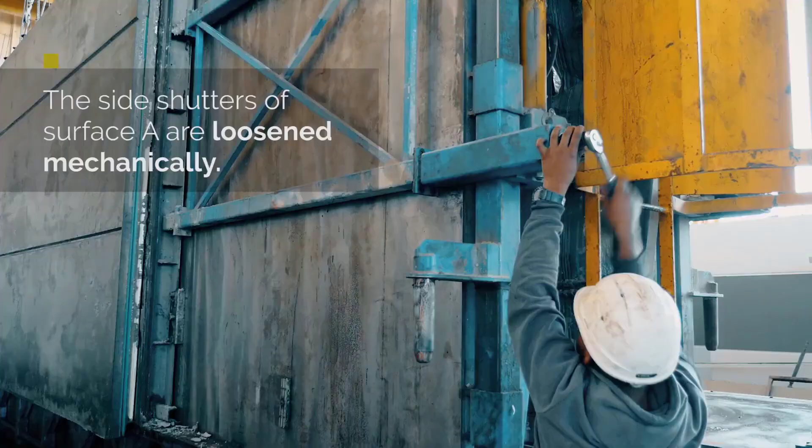Phase 3: Panel extraction and conclusion. The culmination of this intricate process manifests in Phase 3, where meticulous attention to detail facilitates the seamless extraction of the completed panel. This phase involves a meticulous release of pins, shutters, and stoppers, allowing for the delicate detachment of the panel from the mold.

The attachment of an overhead crane to surface B signifies the commencement of the extraction process. Through a carefully orchestrated sequence of mechanical movements, surface A elegantly transitions backward, ultimately lowering to a horizontal position. Subsequently, the loosening of surface A's side shutters culminates in the final separation, marking the completion of this intricate production cycle. At its core, Quikloc combines lightweight, easily accessible building materials with cutting-edge technology to craft precision-manufactured building panels.

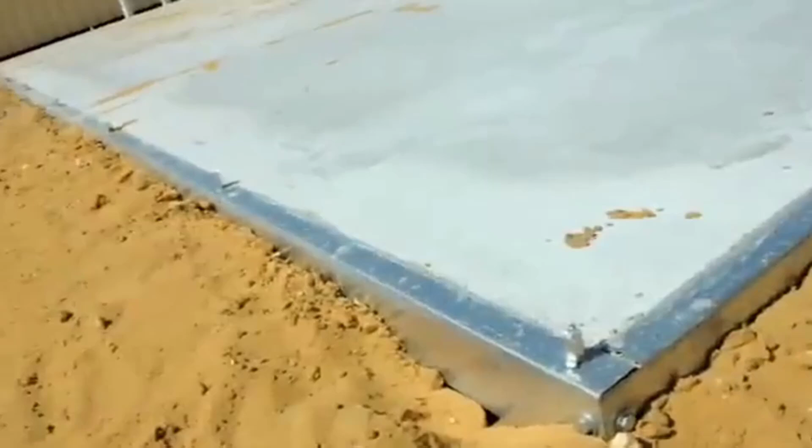These panels undergo stringent quality control measures within a controlled factory environment, ensuring consistency and excellence. The result is a product that facilitates straightforward on-site assembly, overseen by semi-skilled workers requiring minimal trade skills. Preferred builders like Ultra Build exemplify the efficiency of the Quikloc system, erecting stylish and high-quality homes in a fraction of the time typically needed. The technology behind these structures allows for small exteriors that belie spacious interiors, maximizing living space.

The system's efficiency is evident in its components: laser-leveled in-situ formwork for rapid floor surface preparation, standardized 1,200 mm panels color-coded for simplicity during on-site assembly, and aluminum extrusions minimizing site waste and cleanup. Installation follows a straightforward process utilizing heel and toe connections, with top and bottom plates, ensuring strength and stability. Aluminum blades lock panels securely in place, forming waterproof and architecturally pleasing joints.

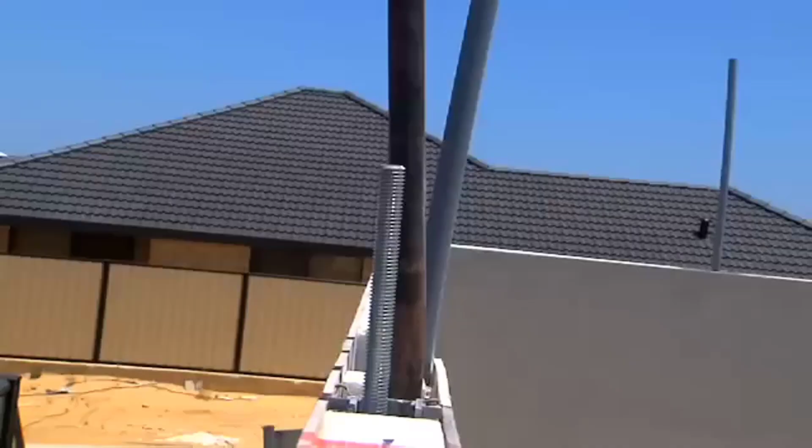Windows integrate seamlessly, with sub-panels accommodating height variations, and preformed holes within panels facilitating the installation of electrical and plumbing services. For roofing, the Quikloc system combines traditional roofing methods with standard trusses and lightweight roof sheathing. This innovation extends beyond mere construction, incorporating thermal and sound efficiencies across diverse accommodation styles, accommodating internal fixings and finishings with ease. It commences with the actual production phase, where a high-strength concrete mix.

Following production, daily module extraction takes place, ensuring timely demolding once the concrete has properly set and cured. These extracted modules are then transported to the construction site for installation. The construction team swiftly proceeds with slab construction, laying the groundwork or foundational slabs where these precast modules will be integrated.

Upon module delivery, the streamlined installation process takes center stage. Remarkably, within a mere 3 hours, 6 precast modules are seamlessly installed, showcasing the efficiency and speed inherent in this construction technique. By day 10, the project is already underway, emphasizing the swift progress achievable with precast concrete.

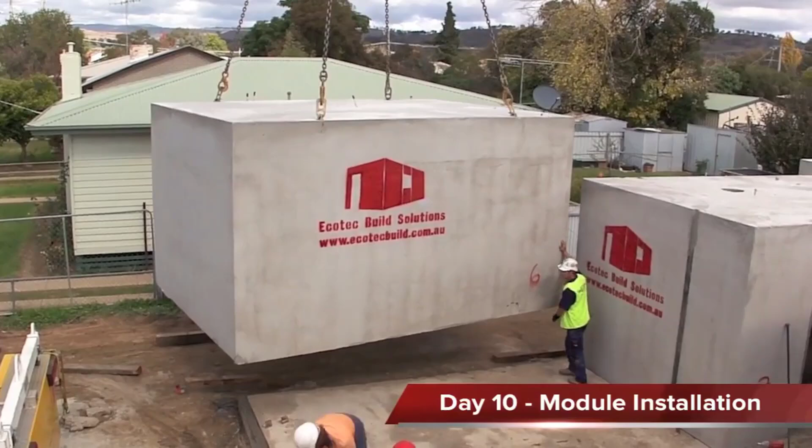As the construction progresses, a significant focus emerges on module installation within internal areas, such as internal hallways. These precast modules, designed for precision and functionality, are strategically placed, optimizing space and structural integrity. The utilization of precast concrete not only accelerates construction, but also ensures consistent quality and strength, providing a robust framework for the building's internal spaces.

In essence, the use of precast concrete modules revolutionizes the construction industry by significantly reducing project timelines, optimizing efficiency, and maintaining exceptional structural strength. This method not only enables swift completion, but also ensures reliability and durability in the long term.

At Lightcrete, they excel in creating lightweight precast concrete elements, especially tailored for residential projects. Their drafting department converts architectural specifications into production drawings. The workforce is highly skilled, boasting extensive experience, ensuring quality throughout the manufacturing process.

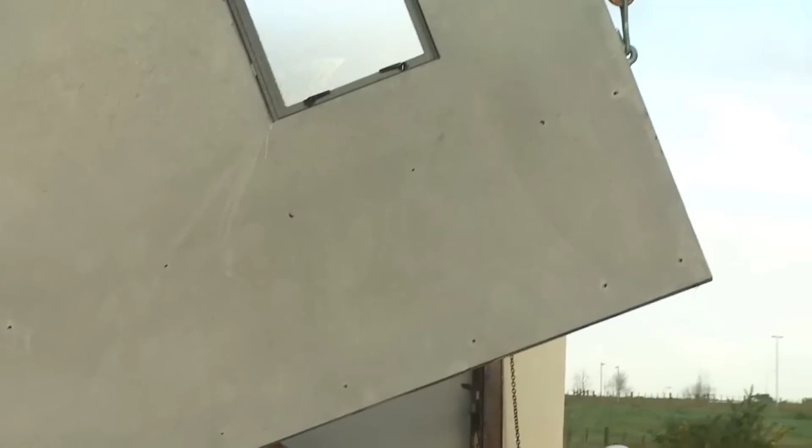One unique aspect is their use of pumice instead of crushed rock aggregate, resulting in a 50% weight reduction and enhanced benefits. They employ Golden Bay cement, a mix with a historical lineage dating back 2,000 years, even used in ancient constructions like the Pantheon.

Their recent project in Flatbush showcases their capabilities. A 67-lot development, comprising 6 different house designs, saw the panels painted and installed before shipment to the site. The installation process involves lifting and lowering panels onto previously cast starters embedded in the floor slabs, showcasing a straightforward yet efficient method.

These precast panels offer outstanding insulation and acoustic properties, meeting building codes without the need for interior strapping and lining. They emphasize the durability of their product, asserting resistance to rot and leaky home syndrome, providing energy-efficient homes with extended fire resistance ratings.

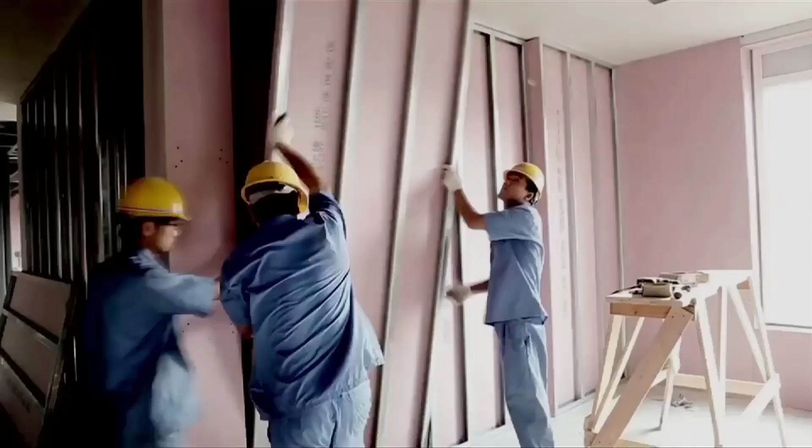The project began with an ambitious goal: to erect a 15-story hotel in record time. What sets this construction apart is the breakneck speed at which it was accomplished. Over the course of just 6 days, a team of dedicated workers, operating around the clock, transformed an empty plot of land into a towering hotel. This is a testament to the incredible efficiency and skill of Chinese construction crews.

The hotel's construction followed a meticulously planned process. It started with laying the foundation, which was a remarkable feat in itself. Each floor was then assembled with precision, and the building steadily rose into the sky. The use of advanced construction techniques and materials allowed for such rapid progress, ensuring the safety and stability of the structure.

Perhaps the most astonishing aspect of this project is its ability to withstand a 9.0 earthquake. This demonstrates China's commitment to engineering excellence and safety standards. The builders spared no effort in ensuring the hotel's structural integrity.

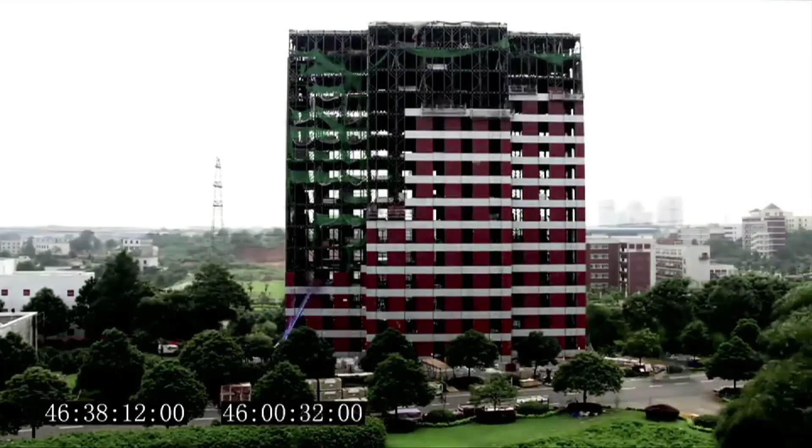This incredible construction achievement is a testament to China's capacity for innovation and efficient project management. It's a reminder that in the modern world, where speed and quality are paramount, remarkable feats like this hotel's construction are possible. It stands as a symbol of China's commitment to pushing the boundaries of what is achievable in the world of construction.

Precast construction is a modern and innovative method of building houses that offers a multitude of advantages, including speed of construction, high-quality materials, and superior cost control.

Precast construction begins with the fabrication of molds for individual concrete units, each designed according to the specific requirements of the project. These molds are then filled with a specially mixed GGBS cement blend, which is prepared on-site. This approach breaks down the construction of a house into a series of individual concrete pieces.

One significant advantage of precast construction is that it allows for meticulous attention to the look and finish of each concrete unit. Advanced techniques can be employed to achieve a higher quality product with greater precision.

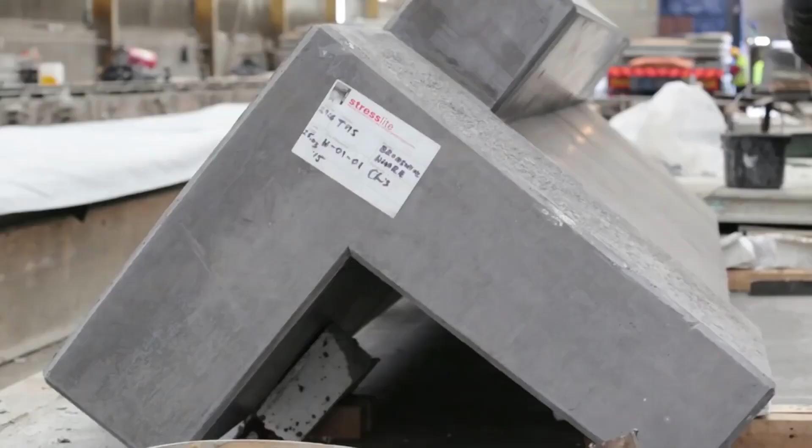Before the concrete units ever reach the construction site, each piece undergoes thorough quality control checks to ensure consistent high quality. One of the distinguishing features of precast construction is that the concrete units are designed on-site and manufactured in a specialized factory, known as a Stresslite factory.

Once the units are ready, they are transported to the building site and placed into position rapidly and accurately. This process significantly accelerates the construction timeline. A typical precast frame package includes various components such as columns, beams, floors, wall panels, stairs, landings, and balconies. With a substantial portion of the house being constructed using precast elements, the overall build time is significantly reduced.

In some cases, it is possible to witness the construction of a 3-story house up to roof level in as little as 4 on-site days, showcasing the remarkable speed of precast construction. Precast construction also offers a wide slab precast composite floor system that can accommodate spans of up to 10 meters. This system is highly adaptable and quick to install on-site, reducing the need for numerous columns or joints.

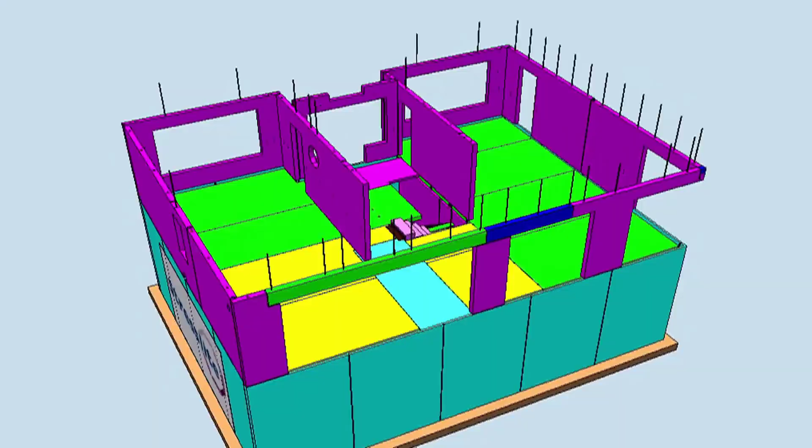It allows for immediate safe access for all trades on-site. Precast stairs, manufactured in the Stresslite factory, are also inserted into the house swiftly and easily. This not only expedites the construction process, but also enhances on-site safety and creates a better working environment for all involved.

Safety is a paramount concern in construction, and precast construction excels in this aspect. Precast floors, walls, and stairs provide superior fire resistance, durability, and strength compared to traditional concrete block construction. This not only ensures the safety of the occupants, but also enhances the long-term value of the house.

Another advantage of precast construction is its exceptional acoustic insulation properties. Test figures reveal that a 150 mm concrete floor can achieve airborne sound insulation as high as 50 decibels. This ensures a quieter and more comfortable living environment for the residents.

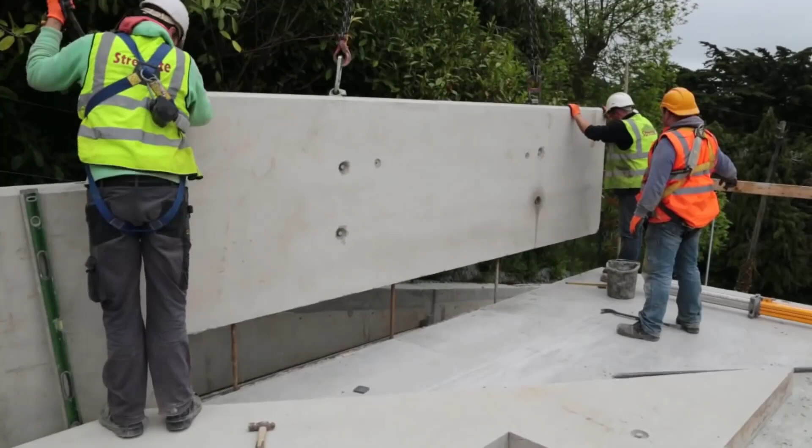The speed and simplicity of the precast construction process also offer flexibility in layout and design. Internal walls can be modified, and load-bearing walls can be replaced by beams, accommodating changes in the design without significant delays or complications. Furthermore, the quick construction method allows various trades to plan and execute their services efficiently. This minimizes the likelihood of wandering pipes and conduits, contributing to better maintenance and management of the home in the future.

Precast construction is not only advantageous from a construction perspective, but also from an environmental standpoint. The materials used to create precast slabs are sourced close to the Stresslite factory, reducing transportation distances and the use of fossil fuels. Additionally, this construction method reduces the overall amount of concrete used in a house by up to 20%, and the generation of construction waste on-site is nearly eliminated. This makes precast construction an environmentally friendly choice.

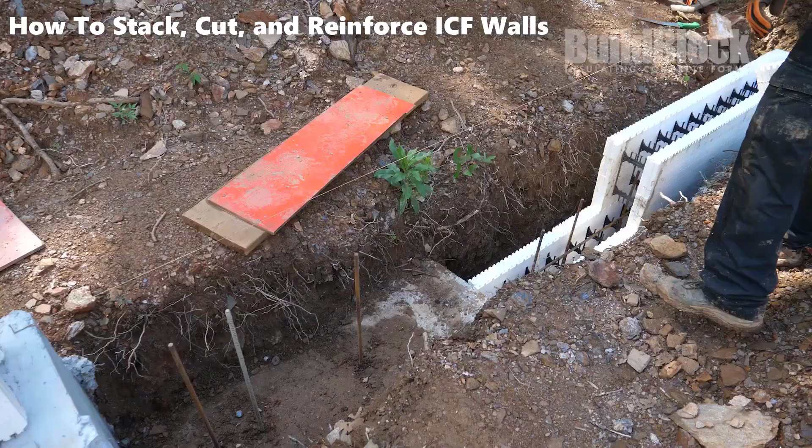When beginning to stack ICF blocks, it's essential to take advantage of the even interval height steps provided. This allows for a systematic approach to stacking. Each block fits neatly on top of the other, ensuring a stable foundation.

Lock each block in place securely before moving on to the next one, in cases where unique architectural features are needed, like the circular tower in the hilltop house mentioned. Specialized radius blocks, like BuildBlock radius blocks, can be used. These blocks are designed to create curved structures smoothly and efficiently.

While stacking ICF blocks, it's essential to incorporate horizontal rebar reinforcement as specified by engineering plans. This reinforcement helps to strengthen the walls and provide structural stability.

Once all the ICF blocks for the basement walls are stacked, it's time to brace and install scaffolding. The purpose of this is to prepare for the concrete pour. Properly bracing the walls ensures they can withstand the weight of the concrete. Using the installed scaffolding, vertical rebar reinforcement is added. This reinforcement runs between the two courses of ICF blocks and further enhances the structural integrity of the walls.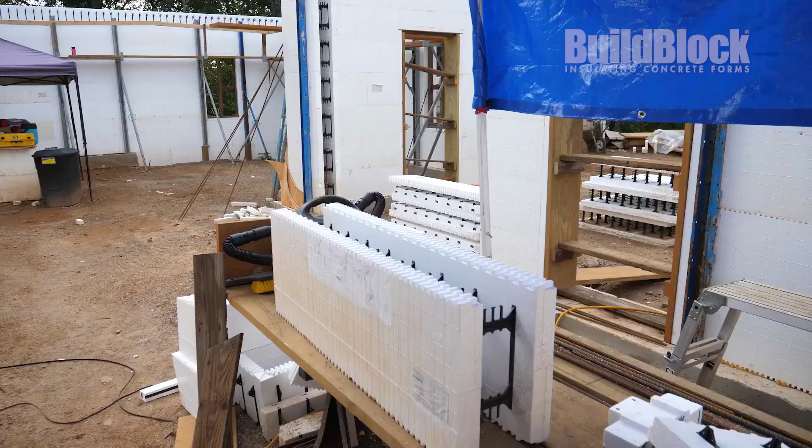At times you may need to cut ICF blocks to fit specific dimensions. To do this, a table saw can be used to make horizontal cuts. It's crucial to ensure that the cut is precise, aligning with your construction plans. For any parts the table saw cannot reach, a sawzall can be employed to complete the cut. Be mindful to cut the web on the same side as your notch to minimize waste. After making cuts, it's essential to clean up any rough edges or remaining web sections. This can be done using nippers or other appropriate tools to ensure a smooth and secure fit between blocks.

Depending on your construction requirements, you may need to adjust the height of the ICF wall courses. In some cases, you may trim a course to fit precisely with your design plans. This is often necessary when working with architectural elements like the build deck mentioned in the document. In the example provided, the basement height is specified as 9 feet 4 inches, with an 8-inch build deck to be poured on top. The number of courses is adjusted accordingly to achieve the desired height, ensuring a seamless transition to the subsequent construction phases.

The slip-form construction method has revolutionized the way large concrete structures like silos are built, offering efficiency, precision, and speed in the construction process. A notable example of this technology's successful application is the construction of a 25-meter high run-of-mine (ROM) concrete silo for Assmang BREP in the Northern Cape, South Africa. Designed by the engineering firm DRA and constructed by Stefanutti Stocks Civils, this impressive structure showcases the capabilities of slip-form construction.

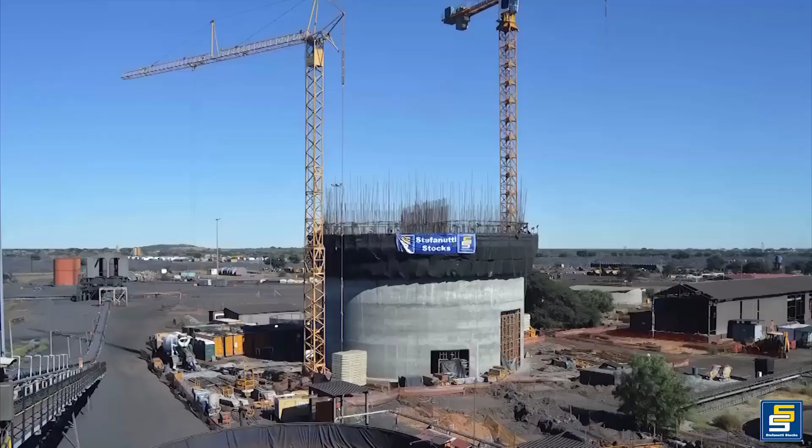The Assmang BREP silo serves a crucial purpose in the mining industry, providing a secure and efficient storage solution for bulk materials. Its cylindrical shape and towering height of 25 meters make it a prominent feature in the landscape. But what sets it apart is the slip-form construction technique used in its creation. Slip-form construction involves continuously pouring concrete into a moving formwork that gradually rises, creating a seamless and structurally sound concrete structure. In the case of the Assmang BREP silo, the slip-form method was used to construct 4 equal quadrants, ensuring uniformity and strength throughout the structure.

One of the key advantages of slip-form construction is its ability to achieve high precision and consistency. The concrete is poured at a controlled rate, resulting in a smooth finish and uniform thickness. This precision is vital in ensuring the silo's structural integrity and longevity, especially in the challenging conditions of the mining industry.

At the heart of their innovation lies the utilization of locally available materials, such as desert and river sand, ash, and other indigenous resources. These materials are ingeniously bound together to form robust building blocks, serving as a sustainable alternative to traditional cement and clay bricks.

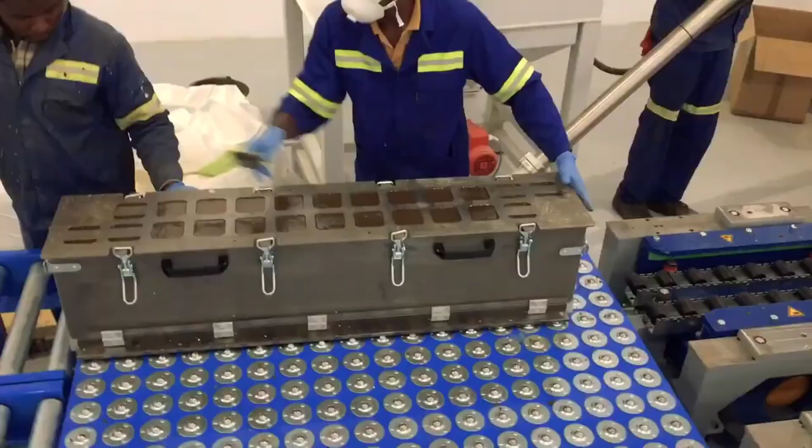The polymer concrete building blocks developed by Polycare exhibit exceptional properties that surpass those of conventional construction materials. These blocks boast superior hardness compared to concrete while maintaining lower weight and exceptional size and shape tolerances. Notably, they are impervious to water absorption, rendering them completely waterproof, frostproof, and corrosion-resistant. Their high resistance to UV radiation and temperature variations further enhances their durability and longevity.

Beyond structural integrity, Polycare's building blocks incorporate built-in insulation, contributing to energy efficiency and thermal comfort. This inherent insulation reduces the need for additional heating or cooling systems, keeping buildings naturally cool in summer and warm in winter.

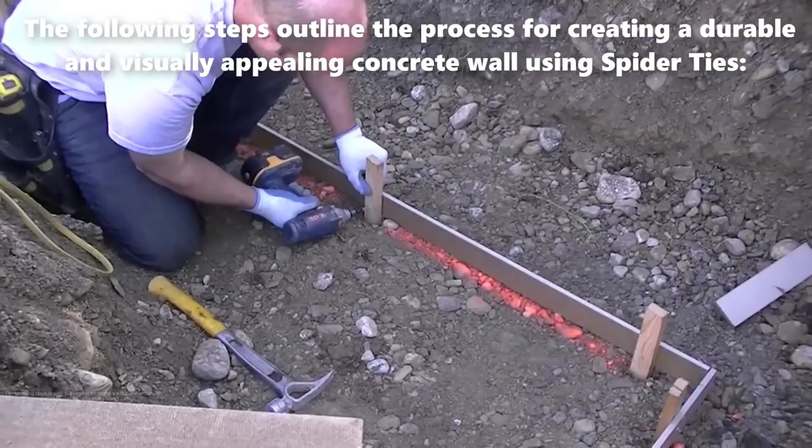Begin by marking the outline of the wall and driving stakes into the ground at 3-foot intervals. Secure the spider ties to the stakes, ensuring they are positioned correctly for the desired wall shape. These ties will hold the concrete in place during pouring and curing.

Preparing the footing is a critical step in ensuring the stability and longevity of the monolithic concrete wall. To accomplish this, the process begins with the utilization of pre-mixed dry sack cement. Upon obtaining the dry sack cement, the next step involves wetting it down with water. This hydration process activates the cement, causing it to bind together and form a cohesive mixture suitable for creating a stable foundation. Much like setting fence posts, this wetting down process ensures that the dry cement mixes thoroughly with the water, creating a consistent and workable material.

Once the dry sack cement is adequately moistened, it is applied to the designated area where the wall's footing will be established.

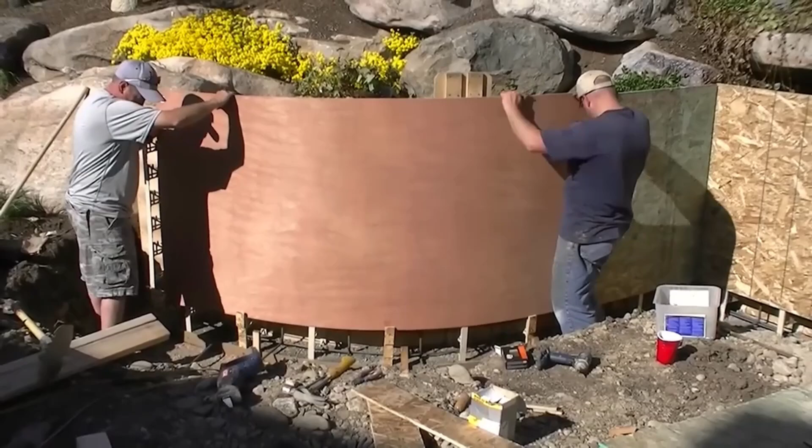Determining the desired height of the wall is a crucial aspect of the construction process, as it dictates the overall appearance and functionality of the structure. Before proceeding with the wall building process, careful consideration must be given to ensure that the height aligns with both aesthetic preferences and practical requirements.

To begin, the contractor or designer evaluates the landscape's contours and the intended purpose of the wall. This assessment helps determine whether the wall should follow the natural slope of the terrain or maintain a consistent level. For aesthetic purposes, the height may be adjusted to create visual interest or complement surrounding features. Once the desired height is established, it is marked along the length of the wall using measuring tools and chalk lines.

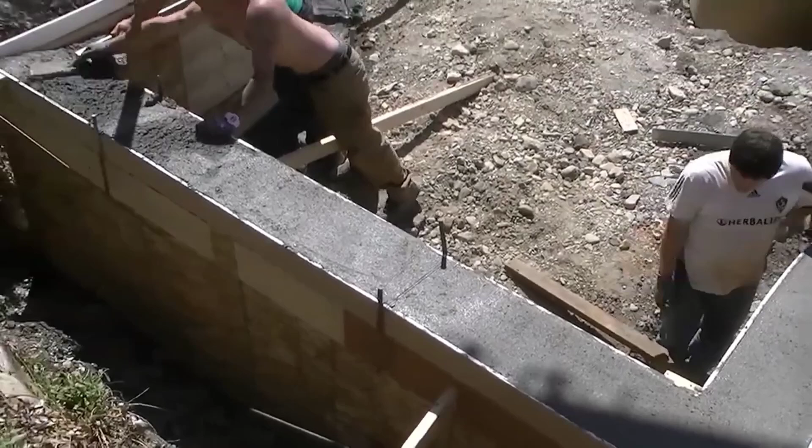Achieve the proper mix design for the concrete to ensure optimal flow and strength. Begin building the wall using the spider tie system, stacking the ties up to 4 feet high and adding rebar for reinforcement as needed. Customize the wall as desired, adding features such as cantilever edges or decorative elements.

At the heart of the A-fold concept lies its modular design, which allows for easy assembly and disassembly of prefabricated components. Constructed primarily from wood, a renewable and environmentally friendly material, the A-fold house offers a harmonious blend of modern aesthetics and sustainable living. The construction details of the A-fold house reveal meticulous planning and innovative engineering. Each module is precision engineered off-site, ensuring consistent quality and minimizing on-site construction time. This not only reduces environmental impact, but also streamlines the building process, enabling quicker occupancy.

Maslow Homes, the Spanish partner in this venture, brings local expertise and insight, ensuring that the A-fold house aligns seamlessly with Spanish architectural and environmental standards. By partnering with a local firm, A-fold demonstrates its commitment to adapting its modular housing solution to diverse geographical and cultural contexts. Furthermore, the A-fold house in Spain exemplifies adaptability.

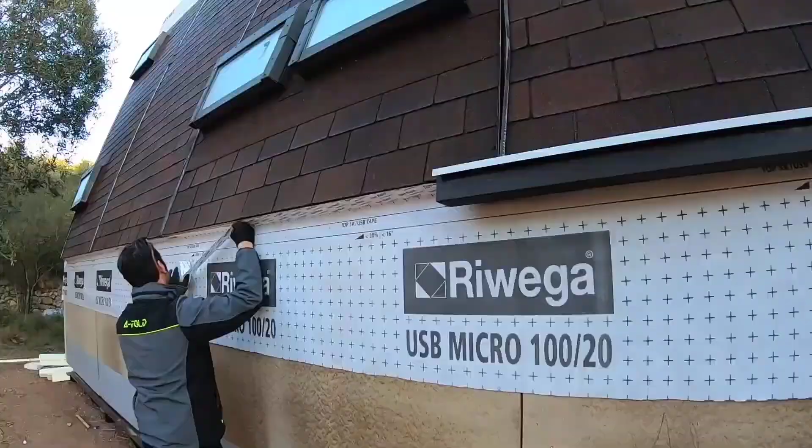Its modular design allows for easy customization and expansion, catering to the evolving needs of homeowners. Whether used as a primary residence, vacation home, or temporary shelter, the A-fold house offers versatility without compromising on sustainability or durability.

One of the key features of the StormTrap system is its versatility. It can be customized to accommodate various site requirements, including size constraints and specific load-bearing needs. Additionally, the modular design allows for easy installation and scalability, making it suitable for both small-scale residential projects and large commercial developments.

The StormTrap system employs a combination of infiltration, detention, and retention techniques to manage stormwater effectively. During periods of heavy rainfall, excess water is captured and temporarily stored within the system, gradually releasing it back into the environment or allowing it to infiltrate into the ground. This helps to alleviate pressure on municipal stormwater infrastructure and reduce the risk of downstream flooding.

Furthermore, the StormTrap system promotes sustainable water management practices by facilitating rainwater harvesting and groundwater recharge. By capturing and storing stormwater for later use, it helps to conserve water resources and mitigate the impact of drought conditions.

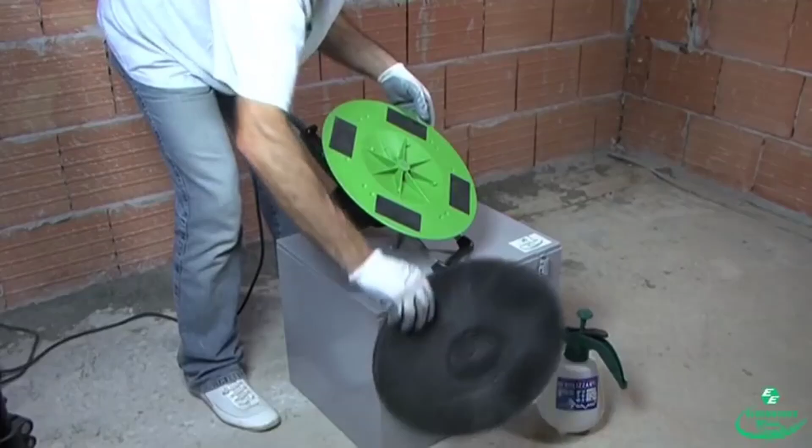One of the standout features of the EPG 400P is its compact and lightweight design, which allows for easy transportation to job sites. This portability is further enhanced by its cordless operation, eliminating the need for a connection cable to a transformer. As a result, setup time is reduced and maneuverability is improved, particularly in tight spaces or areas without easy access to power sources.

Despite its small size, the EPG 400P packs a punch in terms of power and performance. With a 500-watt motor, it delivers efficient sanding and polishing capabilities across various surfaces. The sander's low rotational speed, ranging from 0 to 100 revolutions per minute with electronics and 85 revolutions per minute under load, ensures precise control, comparable to manual sanding techniques. This feature is especially beneficial for delicate tasks such as ceiling finishing, corner trimming, and vertical wall cleaning, where precision is paramount.

When it comes to smoothing rough mortar, a hard disk attachment for power tools like angle grinders or finishing sanders can be invaluable. These hard disks are typically equipped with abrasive materials, diamond or carbide grits, allowing them to effectively grind down rough surfaces and uneven patches of mortar. They provide a quick and efficient solution for achieving a smooth and uniform finish, making them essential tools for masonry and construction professionals tasked with mortar preparation and surface refinement.

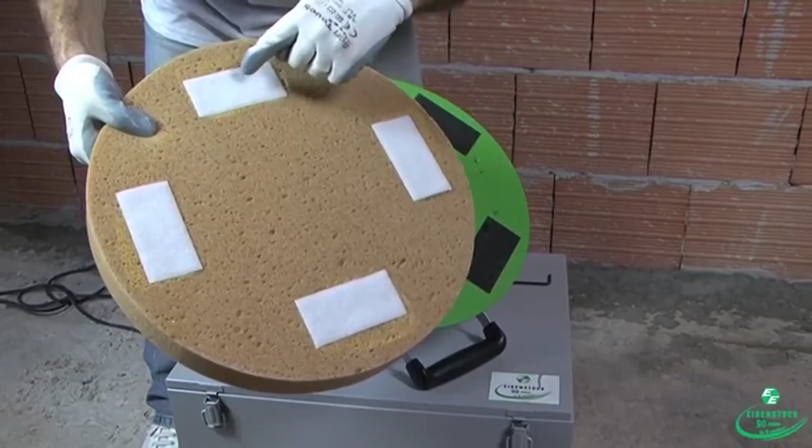A backing pad with metal plates and tobacco sponge serves as a versatile tool in various industries, particularly for polishing and finishing applications. The metal plates provide stability and durability to the backing pad, ensuring consistent performance under pressure. Meanwhile, the tobacco sponge, known for its absorbent and resilient properties, offers cushioning and flexibility, allowing for smooth and even surface contact during polishing tasks. This combination enhances efficiency and precision in surface refinement processes.

Before starting the edging process, professionals clean the edges of the asphalt surface. This involves removing any debris, dirt, or vegetation that may obstruct the application of the seal coat. Additionally, they inspect the edges for cracks or damage that might require repair before sealing. To prevent seal coat overspray onto adjacent surfaces, such as concrete, grass, or buildings, the pros use masking tape or specialized edging tools. This precise masking ensures a clean boundary and minimizes cleanup efforts later.

The key to achieving flawless edging lies in the technique. Pros typically start by applying a thin line of seal coat along the edge, using a brush or edging tool, ensuring even coverage. They then feather out the seal coat slightly onto the adjacent surface to blend seamlessly. Attention to detail. Professionals pay close attention to detail throughout the edging process. They take their time to ensure every inch of the edge is properly coated, avoiding missed spots or uneven application.

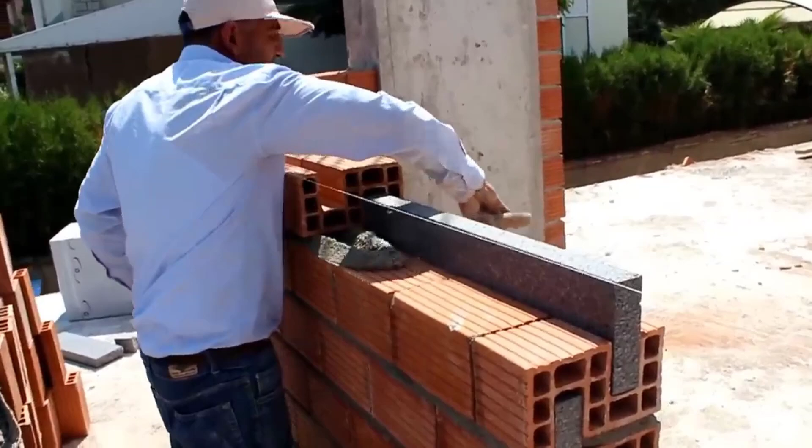Available in two dimensions, 190 by 190 by 135 mm and 240 by 240 by 135 mm, with varying wall thicknesses, these thermal bricks are versatile and adaptable to different construction needs. What sets them apart is the incorporation of carbon-reinforced styrofoams, produced with a density of 16 to 18 kilograms per cubic meter, which enhances their structural integrity and insulation properties. The synergy between the thermal bricks and carbon-reinforced styrofoams is seamless, thanks to engineering and manufacturing processes. Furthermore, the special packaging ensures that these components reach the construction site intact and ready for application.

One of the standout features of these thermal bricks is their user-friendly design. Equipped with special half-cut edges for corner application and a staggered pattern for optimal installation, they facilitate easy and efficient construction practices. Whether it's a new build or a renovation project, these bricks can be seamlessly integrated into any construction endeavor.

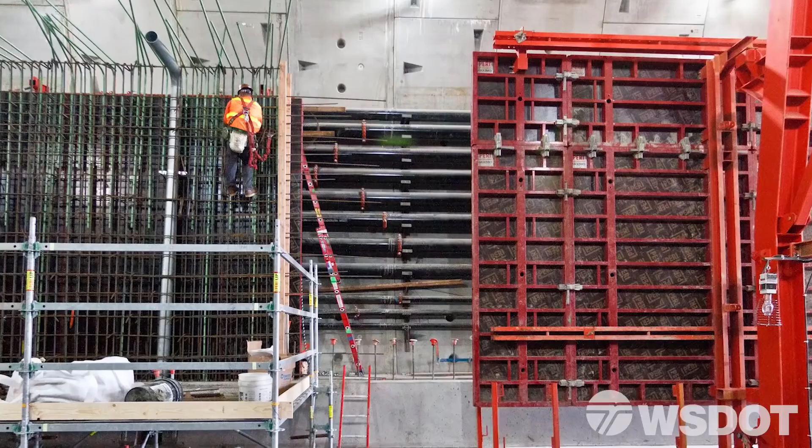Simultaneously, crews work on erecting the tunnel walls, comprised of reinforced concrete panels weighing 13 tons each. The meticulous process involves setting the reinforcing steel, placing forms, and pouring concrete to create sturdy, upright, sandwich-like structures. Once the walls are completed and cured, attention shifts to the upper roadway deck. This involves intricate processes, including ensuring access beneath the deck for the tunnel boring machine and applying special coatings to prevent corrosion on reinforcing steel.

Pouring concrete for the upper roadway deck is a collaborative effort, with various team members handling specific tasks to ensure top-notch quality and finishing. The goal is to create a smooth and durable roadway surface, crucial for drivers' safety and comfort. As the upper deck nears completion, efforts turn to the lower roadway, which sits atop the corbels. This section is precast off-site for efficiency and set in place toward the project's conclusion.

The magnitude of this construction project is evident in the sheer volume of concrete used, enough to build 9 football stadiums. Once finished, the State Route 99 tunnel will stand as one of the longest roadway tunnels in the United States, promising to transform Seattle's waterfront and revolutionize transportation in the region.

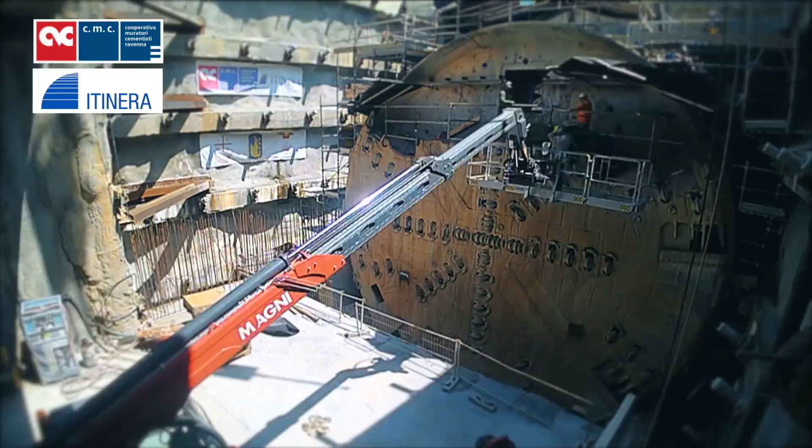Between April 17, 2018 and July 27, 2018, the SS1 Nuova Aurelia witnessed an extraordinary engineering feat carried out by the tunnel boring machine, TBM, named Lucia. Nestled within the expansive construction site, the TBM Lucia became a formidable force, delving deep into the Earth's crust to carve out 3 significant tunnels, Baschi, S. Paolo, and Cappuccini. These tunnels, collectively spanning an impressive 3,500 meters, stand as a testament to human ingenuity and determination.

The inception of this monumental endeavor marked a new chapter in modern construction, as the TBM Lucia, resembling a colossal metal serpent, commenced its relentless journey beneath the surface. With unwavering precision, this mammoth machine bore through layers of rock and soil, shaping pathways that would soon become vital conduits for transportation and connectivity.

The first of these tunnels, Baschi, unveiled itself as a triumph of engineering prowess. Stretching through the subterranean expanse, it ran for a considerable distance, weaving its way through the natural geological formations with unparalleled accuracy. As Lucia diligently progressed, S. Paolo emerged as the next testament to its unwavering determination. This tunnel, a testament to human perseverance, added to the tally of impressive accomplishments, further solidifying the TBM's significance in this ambitious project.

Undeterred by the challenges inherent in tunneling, Lucia navigated its way through the earth with an almost relentless fervor, carving the Cappuccini Tunnel into existence. Each meter carved was a testament to the collaboration between human intellect and technological marvel. These tunnels not only represented physical passages, but also stood as metaphors for the triumph of human endeavor over seemingly insurmountable obstacles.